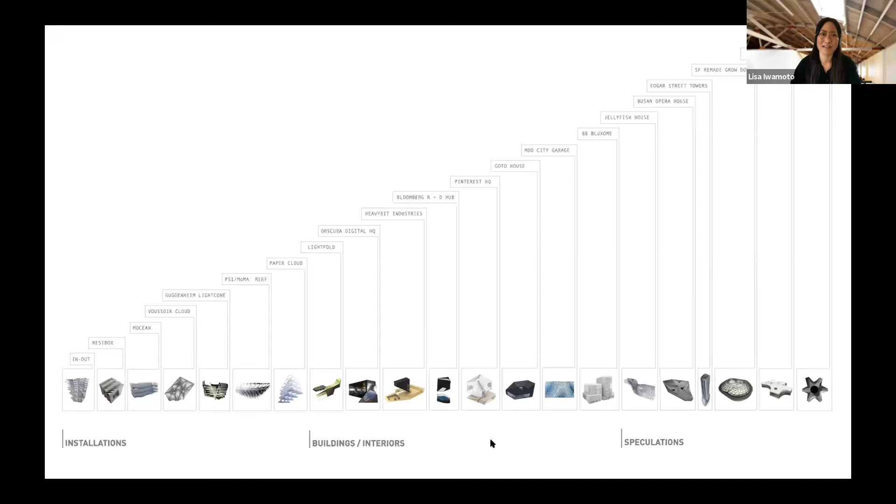So with that, I've culled the group of projects quite a bit for the sake of time, but also rearranged them for some conceptual clarity, and then added some more recent projects in, as well as some things that we have on the boards.

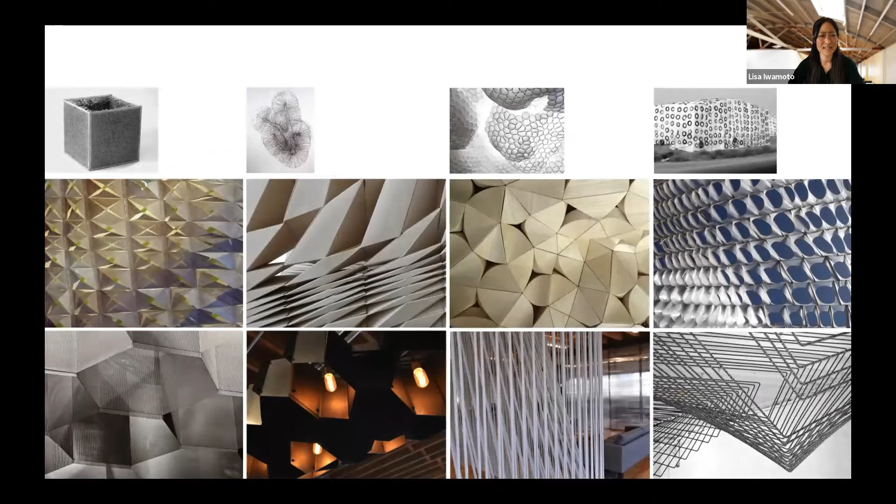So with that, I'd like to begin first with the installation scale. Here for us, we're very much inspired by conceptual and abstract art, which is shown here at the top. This is an Eva Hesse piece and Antony Gormley.

The idea for us is how multiple parts can come together to create a more synthetic whole, and how that whole can give a kind of perceptual performance that the parts in and of themselves might not have. Then there's a Tara Donovan styrofoam cup piece, and actually just a tire ballast over some hay bales in the Midwest. The idea is how ordinary materials can be transformed and defamiliarized through the way they're brought together.

Our installation work was really twofold. On one hand, we were looking at how to make thin materials volumetric and how to think about creating structure through geometry. I have a structural engineering background prior to becoming an architect, and while I was not a very good structural engineer, that experience has now folded into our practice in a way that is very tangible in how we think about materials in different ways.

The other side of our material explorations had to do with how we can take something quite ordinary and turn it into something that is perceptually more performative than the original piece itself.

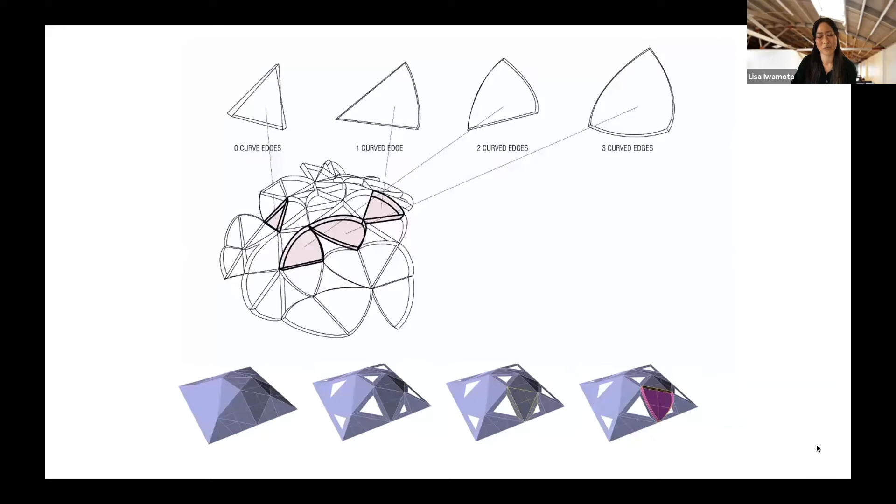In other words, the closer they were together, the more structural the overall form became, and the less they were packed together, the less structural the form became. This is where the conceptual clarity of the project came together.

We were making little handmade models for a number of weeks without really knowing what we were doing. It was only as we started to assemble them in greater parts that we began to realize what we were trying to achieve: a kind of mashup of 2 structural paradigms.

One being the idea of the arch, which is a pure compressive element, and the other being the idea of this very thin catenary member, which has almost 0 stresses. So how can we fold those things together to have the ultra lightweight spanning element that would normally be in tension, but actually here is in compression.

At that point, we started to work with some really good engineers in Los Angeles to do these digital hanging chain models for us and to start to understand the flow of forces overall, which of course influenced the way the modules began packing together.

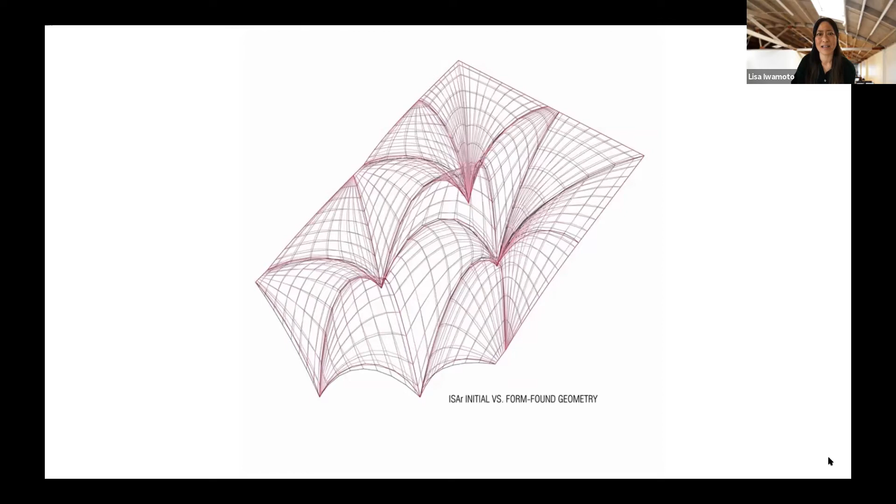This is just a bit of description of the process, very edited. What you see here is the gray surface, which is the surface we provided the engineers, and the pink surface came back to us. Through that subtle change in geometry, the engineers were able to modify the structure and reduce the loads by about 90%.

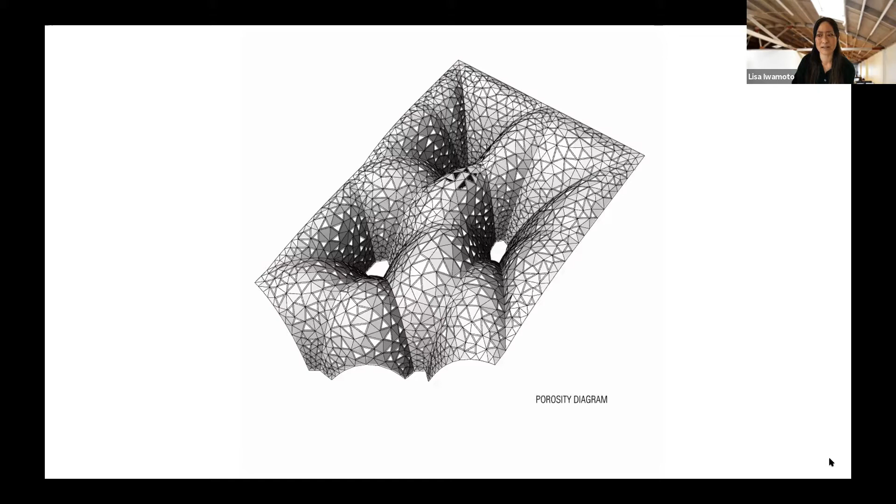From there, we tessellated it to have more openness and porosity where less structural performance was required, and more packing and tighter knit, closer modules where we needed the forces to be able to travel down into the columns.

Then ultimately a script that would help generate those modules. We were really lucky in this particular gallery. This is a voussoir cloud at the SCI-Arc Gallery, in that the gallery is not only seen from within, but it's also seen from without.

There was a very different experience from this catwalk on the upper level, where you could see the overall form and structure, versus what it was like underneath, where we were most interested in the material's ability to become translucent at times, as well as the pattern casting a certain quality of shadow and light.

For us, the translucency was really important because this asymmetrical hypostyle hall, we wanted to recall the idea of the former vaulted stonework that hypostyle halls had throughout history. Sometimes the modules feel quite opaque, almost like that voussoir block, the voussoir being the stone of the arch, and because of the curved seam, almost seeming like it's in compression because of the weight, although this deformation is really more because of the geometry of the edge.

And then at other times being that ultra lightweight member. So the material itself could speak to this form and overall structure being both compressive, but also seemingly in tension and almost ephemeral as well.

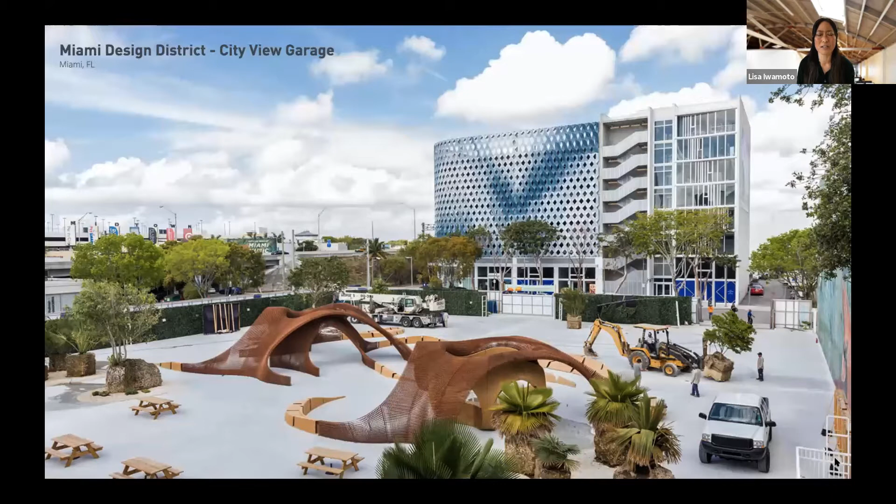And then from there, as we started moving into the building scale, I grouped this with the installation because for us these are just bigger scale installations. We were again really interested in how to take something flat and, through folding and geometry, allow it to have some structure.

I'm not actually speaking of these fantastic pavilions by Shop, which are in the foreground and are 3D printed, but rather the parking garage in the back, which included a small office space, the stair, and then the facade. Here the material is aluminum rather than wood, but in principle the way the folds work is very much the same.

Of critical importance to us was that the facade felt like a mural across the face of the building, and didn't seem like panels, structured individual pieces, but rather a whole across which almost literally paintbrushes would take a swath over the top.

This was a mock-up which showed the original structure, which had a series of verticals behind, and this is something we really tried quite desperately to avoid. Because of that, the form of the panel had to be self-structural as well.

So this starts to describe what that structure is: there are a set of verticals cantilevered from the top and also the bottom of the slabs, which allows the middle panels to be free floating. They're obviously held in gravity, but also this is Miami, so there are hurricane force winds there, and these middle panels need to resist quite a bit of lateral load. They're able to do that because of the folding of the pieces themselves.

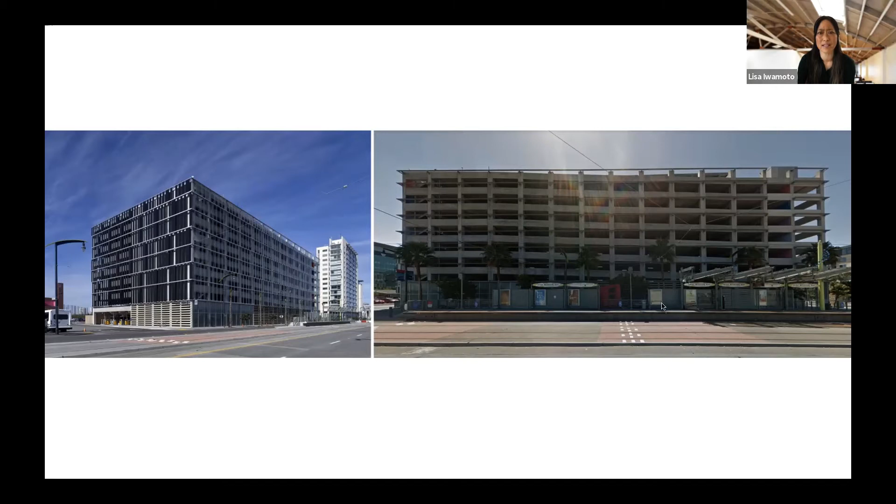They were never able to diagnose the reason why, but the glass panels were cracking, which of course is not what you want, because it can crack and fall and hurt someone on the sidewalk below. So the garage stayed in this unfinished state after they removed the glass panels for almost 10 years, and people kind of accepted that as just the final garage design, without much of a facade on it.

But more recently, the Chase Center, home of the Golden State Warriors basketball team in the San Francisco Bay Area, was being built across the street. They approached the client, the University of California at San Francisco's medical facility, who didn't want to be looking at what felt like an unfinished garage and asked if something could be done. So we were invited into a competition, which we ultimately won, to put a facade on the existing structure of the garage.

Because UCSF is a biomedical research and teaching facility, it was important to them and to us that the facade could speak to their brand and what they did. So we developed a series of abstracted panels based on the DNA strand, as well as DNA sequencing along vertical stripes, and used the existing horizontal rails to attach this vertical structure.

This was a very limited budget project, so we wanted to use everything we had at our disposal. We also wanted to develop efficiency in the modularization itself. While we wanted variation, we didn't want 1,000 unique types, so we developed 12 types and a few halves.

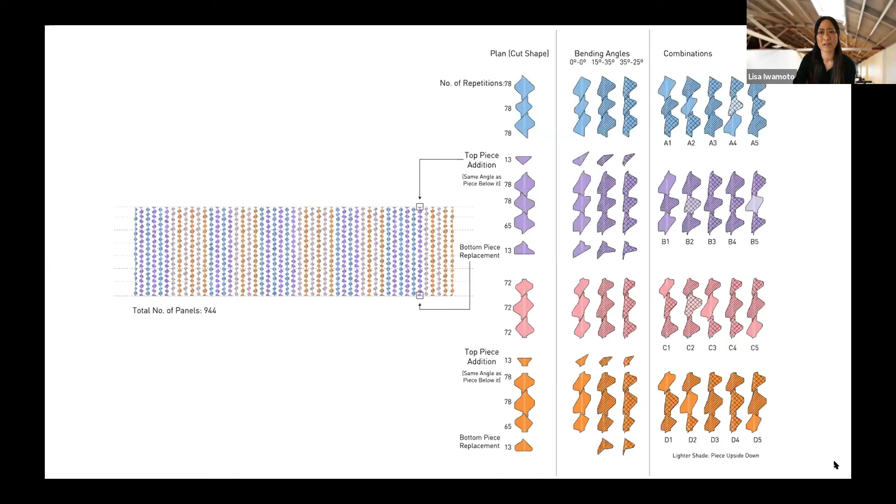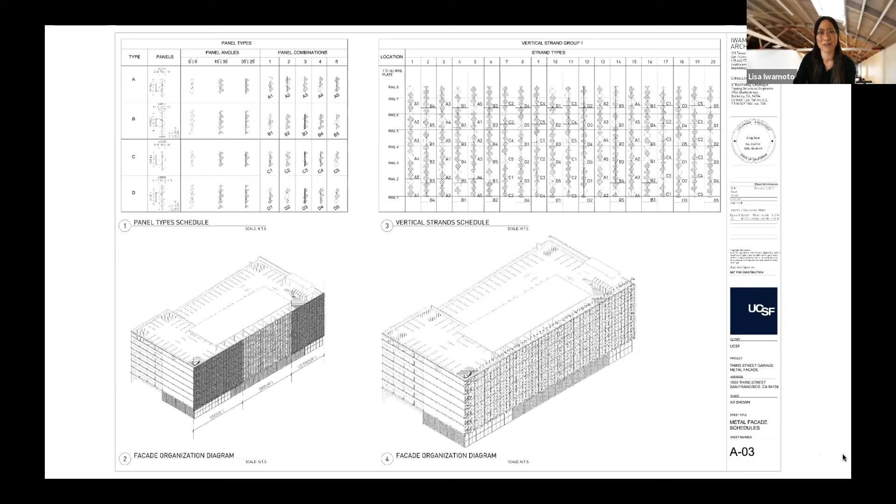Each panel type could be bent at three different angles, and through mixing and matching different combinations, we could get quite a large variety of paneling and angling throughout the whole facade. This just describes the bit of repetition we had across the whole face, and our cheat sheet on how the different modules came together for building.

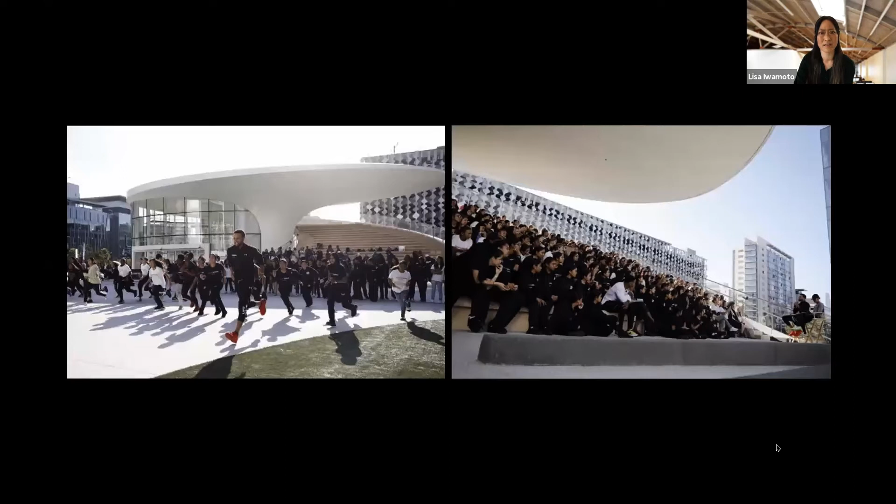This is a view from the Warriors Arena Plaza, and it really serves as a backdrop for events, which is one of our intentions as well—that it could be something somewhat striking when moving by, but could also just fade into the background for those kinds of events, which happened there quite a bit pre-COVID, and we hope will happen there again very soon.

At the building scale, we are still very interested in material exploration and geometry. We tend to be able to do that in a more full way in some of our competition projects, because we have the ability to experiment there, but it's still something we try to bring into our built projects as well, albeit maybe in a more confined or limited way where we are able.

But as our scale shifts toward thinking about buildings, our concepts change as well. While we're still interested in material exploration and use, we're also very interested in form and space. The idea there is something my partner Craig Scott has been obsessed with, and therefore I am too—though he's been obsessed with it over time—the idea of the double negative.

On the upper left here is the Michael Heizer piece entitled The Double Negative, which is a man-made cut going through a natural cut. The idea overall is that two voids can come together to create an intersection which is more than the sum of its parts. And that can happen at multiple scales—the scale of sculpture, the scale of an interior, and the scale of a building.

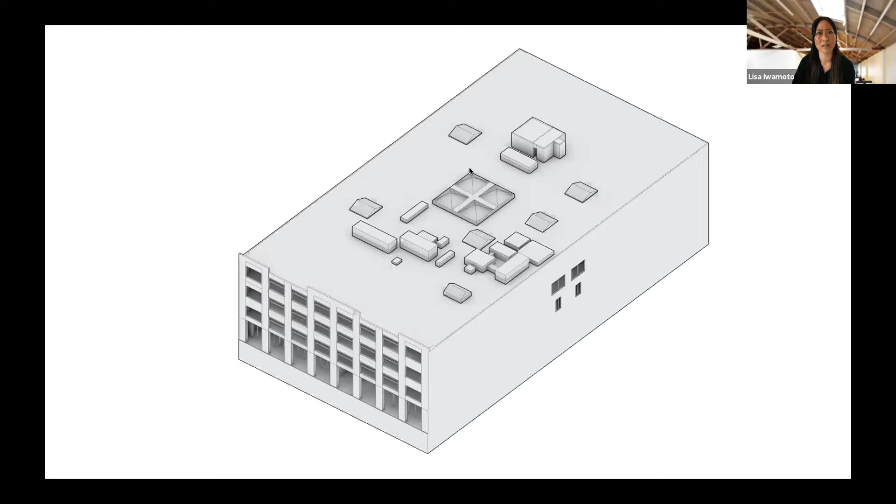The building was very light challenged. It had light on two sides, and then at some point in the 1980s, which we can all agree was not the high point of architecture, particularly in the United States, they added a skylight down to the second floor. Our first act was to bring light further into the building and cut a hole down to the first floor. Our second act was to insert a stair, which at first seems kind of counterintuitive—to cut a hole to bring light down and then put in a stair.

The idea was that the stair could be a light filter as well as a vertical connector throughout the space. That really forms the heart of the building, around which all the circulation, and on the ground floor anyway, all the public functions happen.

We also have a very simple installation at the front, which is this plywood waffle grid, because Pinterest did not lease the full building when they moved in. The idea would be that it could really feel like a Pinterest building at the lobby, which they did own. So this was a kind of takeover moment against the urban edge.

The use of plywood was also quite important to us because Pinterest, as a company, really cares about an economy of means. What we were trying to do is use humble materials in a new way.

Really our work, I believe, had to do with how to bring in light in multiple ways—whether it was through subtle shifting of material, through a simple array of fixtures that could define one space apart from another, through the glowing coffers of the plywood entry, or through the stair itself.

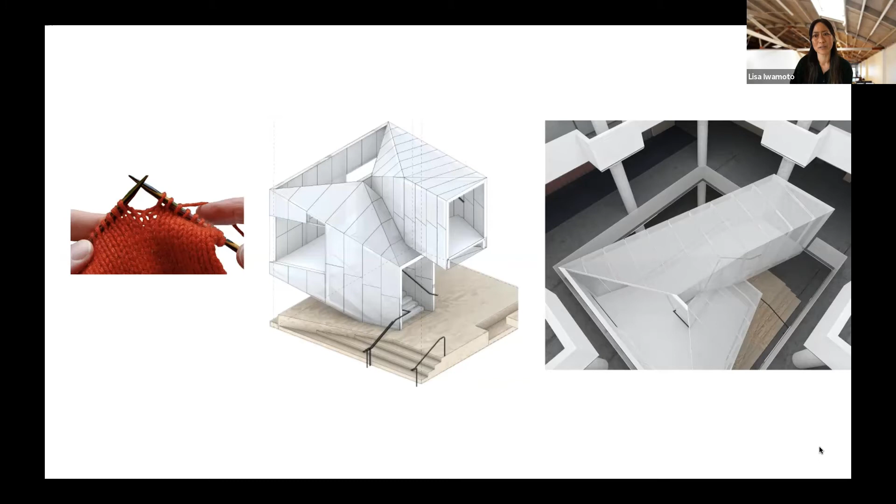There's also a story behind the stair that taps into Pinterest's brand. One of the words they use a lot in their company is knitting, which is about collaboration and cross-functional teams. We took it quite literally, the idea of bringing two things together to form a third. That third was actually a void space in the middle of the needles, critical to building the actual sweater or scarf. So the stair is like two halves of a needle which self-intersect, and that intersection forms a double negative of the stair itself.

This is a view from above in the 1980s atrium, which we did very little to other than paint it and add some plants. But when looking through the stair, there's this transparent moment, this prism, which is that double negative aspect of knitting.

As Pinterest employees bring visitors and partners through, it becomes a small story for them to speak to knitting and how that's really important to the company culture, embodied abstractly in the volume of the stair itself.

The stair is really big, much bigger than it needs to be. So it forms a kind of place for other people to have conversations and even congregate sometimes. It really has become the heart of that building.

This is the double negative intersection from below, and this is it from above, where it forms this glass prism. Then the stair rises up on the second level, a little bit like an animal, to capture the light from above and form the circulation around.

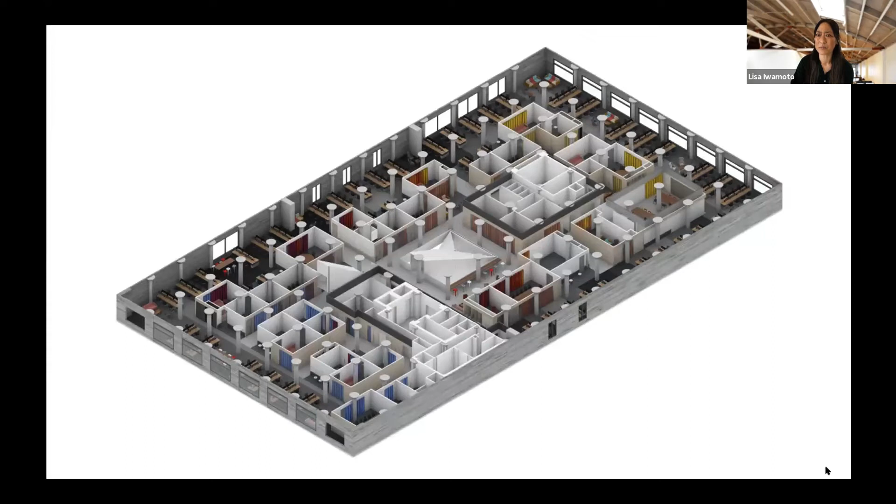For the rest of the space, we thought of the floor plan almost like a mini urbanism. Some of our speculative work came in handy here, because this was the first project of this scale we'd done, period. We had done two interiors before this, and they were both quite small.

Thinking of the floor plan as a kind of mini urbanism, it was just a series of volumes. We were much more interested in using volumes as a way of creating blocks, neighborhoods, streets and alleys than using walls as subdividers and separators of space. So we have a series of volumes which separate and connect the more social, louder center with a quieter perimeter for heads-down workspace.

The volumes take on different characters, sometimes quite transparent and other times semi-transparent. We also had a series of color-coded curtains that acted as an intuitive wayfinding device, since it's a fairly large floor plate and can sometimes be a little confusing.

The other thing we developed was a glass corner, which enabled these see-through, peekaboo moments from open space to open space or from closed space to closed space. It was again the idea of knitting as a visual metaphor, allowing these intersections to happen through a void rather than through a solid.

It also deals with any FOMO employees might have, because while they're moving around this large building doing different things, they also want to be found in case a team member wants to pull them into a conversation or another meeting.

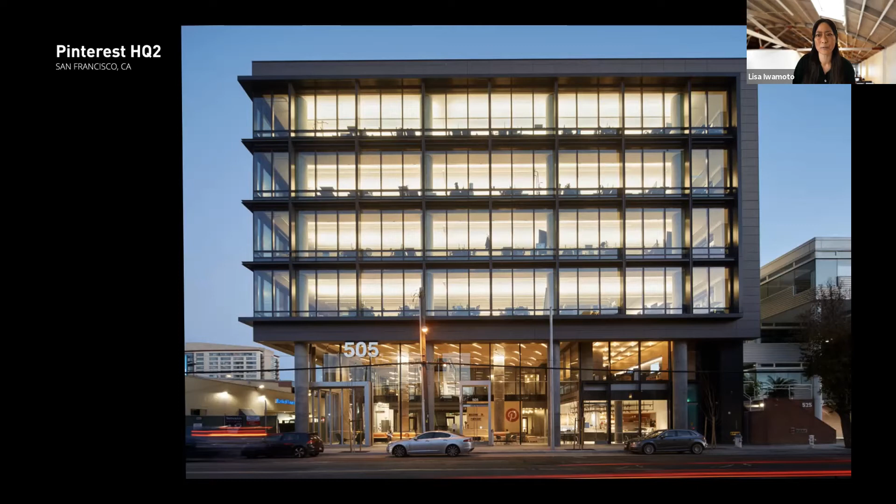So we started to look at slightly more refined materials, but still wanting to use them in a slightly different way. This is the lobby of Pinterest, which is actually also a public space. While owned by the building, it's open for anyone to use during all working hours. That's a San Francisco mandate, mandated for this building as well as throughout the city, and it forms a really nice network of these public spaces within buildings.

Pinterest was really excited about this opportunity. Even though they're taking care of the space, they were excited about bringing in the public and having people there who could share their work with them in a way. So what they did is they chose to open a cafe, and we developed a full kitchen in the basement where they would run this cafe. The cafe becomes part of the lobby, not really closed off, but fully open. It does form that intersection between the public and the Pinterest employees, in a really wonderful way.

So the lobby is very reconfigurable. It has seating, it has tables, it has small spaces for the employees to use as an extended workplace, but it's also a place for anyone from the public to come in. That said, we of course needed to separate out the work of Pinterest across a security line, with their day-to-day operations kept from the public. So the public cannot wander through the entire offices, of course. But we did want to have another kind of intersection among the populations.

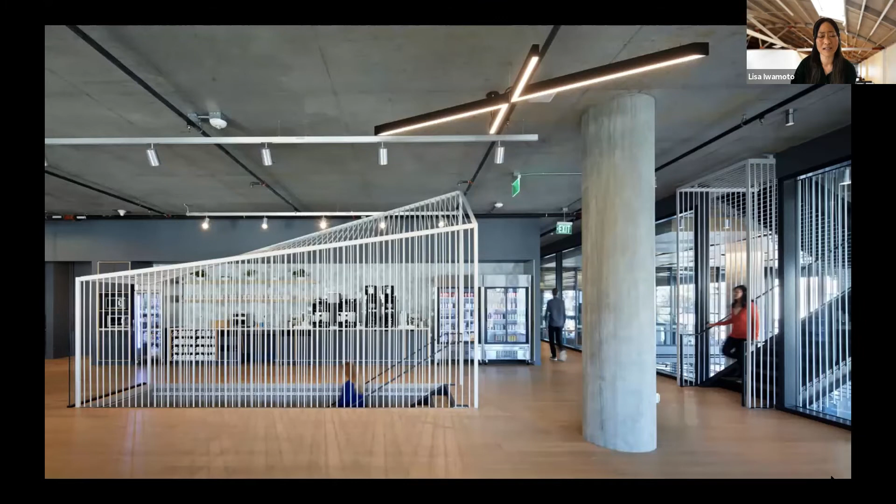This is an entry, this is the rear entry, looking the other way down that internal street. And then moving up, the stair becomes more like an object in the different rooms, and an intermittent connector across the floors.

This is the all hands space. Again, this had a much more limited floor to floor height. So what we worked to do was really compress the typical acoustical sandwich, which often takes 18 inches, here we compressed into like 6 inches. And in doing so, developed integrated lighting which could be both embedded and float free from that acoustical surface, taking on different geometries along the different sides. This again serves as their all hands space or lecture hall, as well as their dining hall.

This is a stair that cantilevers out over the public space. And then the switchback moment describes how it shoots its entire way through the building. This was sponsored by the desire to communicate across the different horizontal levels and have a really clear passageway through the building. Very different from your typical switchback stair.

This was taken right before the building was fully occupied, but pre-COVID it was really like a freeway—people moving up and down, particularly during lunch hours and areas of high traffic. But just the idea of seeing where you're going instigated so much more movement through the space. And the stair itself is clad with metal rods.

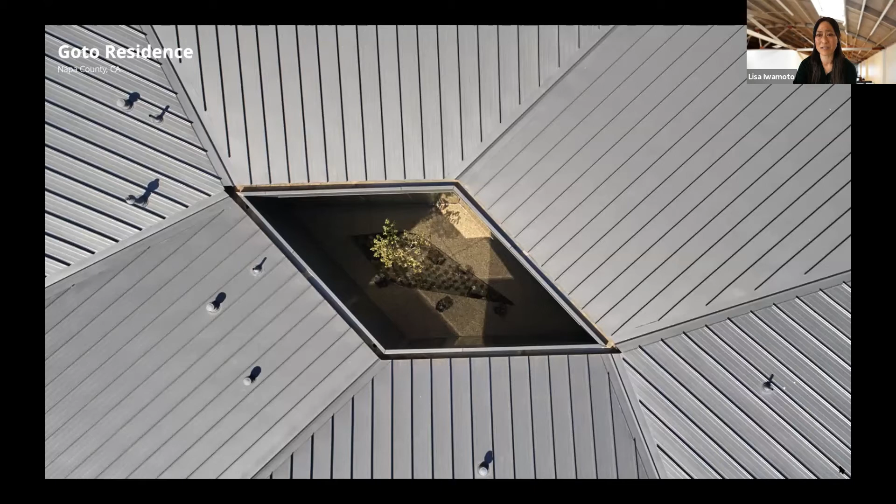Moving on to a full building, this is the Goto residence, which is in Napa Valley. Even though it's a very small building, only 2,000 square feet, 200 square meters, we were able to think a little bit more about what it means for us to design a building in the round. Being in San Francisco, which is a very dense urban place, we're actually not often able to design whole buildings in the round. Even office towers in the city are often hemmed in on two sides by other buildings, in a zero lot line condition. So we were really excited to pursue this project.

The project itself is sited on 95 acres, a really big piece of land in the wine country, but not really in the wine country valley—more on the other side of the hill, which overlooks a beautiful lake, Lake Berryessa.

Clearly looking out to the lake is a really beautiful view, but even looking every direction on this site, there's something kind of different that it offers. There's a quiet side, a side that feels a little more tame with rolling hills, and a side that feels more foresty with the larger mountain behind and bigger trees.

So we really wanted to think about what it means to do a building in the round. And this is a building sited right here.

The house is completely off the grid. It gets its water on site through a creek, which we tap to fill cisterns, and it runs fully off solar power. The garage, also a very simple building we designed, acts as kind of the battery for the house with the solar panels. The water tanks are behind it, and we trench it through into the house. So again, completely self-sustaining as a piece of property.

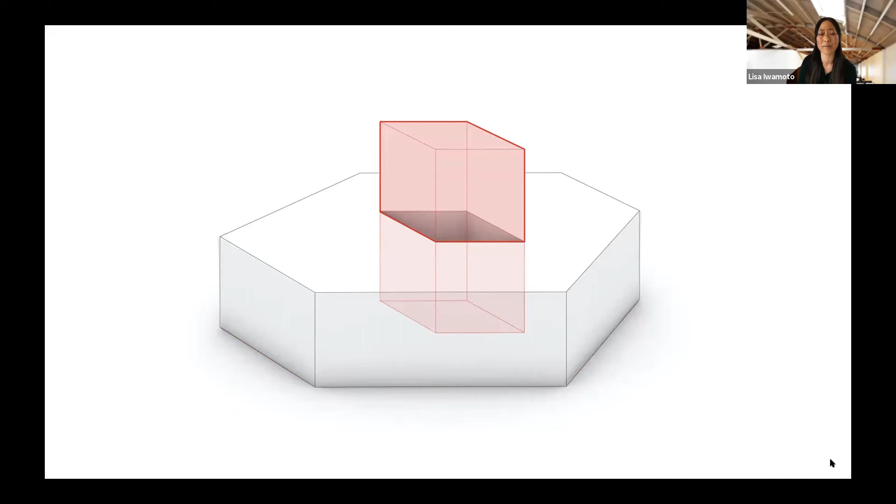So the idea for the house is to take this asymmetrical hexagon, and while it's very outward looking to the views all the way around the site, we also wanted to think about a quiet moment—so also very inward looking with this rhombus courtyard.

The site actually has heaving soils, meaning very unstable soils. In the beginning, the building was structured with deep piers that would go down, like typical piers do, to more stable soil, which meant our building was kind of sitting up on these little piers. At that time it felt very grounded, I would say.

And it wasn't quite in keeping with our intention for the house, which is that while very locally manifest through the views, we didn't actually want to create a house that felt like it was born from the site, but rather something that could hover between being an imported object as well as being very site responsive.

So through the heaving soil discussion, we worked with a structural engineer to make a mat foundation, at which point the building kind of became a slab on grade, which is also something we didn't really want.

So Craig, my partner, woke up one day and said, 'I dreamt the solution to the Goto house.' I was like, 'Oh great,' because I really hated the foundation now and couldn't come up with a better solution. He said, 'Yeah, we're going to cantilever it.' So the building is cantilevered off the base, and it kind of acts like a boat in the water on these heaving soils.

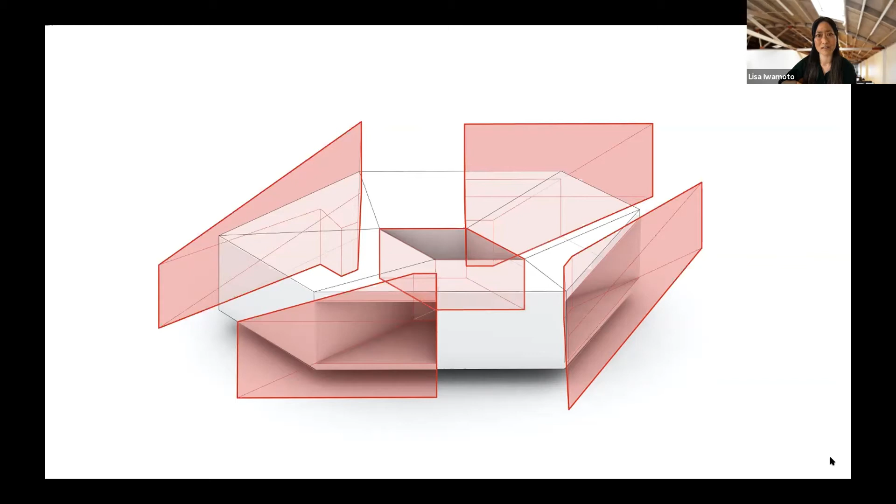At the same time, we've sloped the roof in to capture the little rainwater that does come to the roof into a gutter, which wraps around the exterior of the courtyard. Then there's a series of other porches carved in to take advantage of those views, constructed largely through the view angles as this in-between inside-outside space in order to look at the different sides of the site.

So while asymmetrical as an overall geometry, the rooms themselves are actually really straightforward—just a series of rectangles, very easy to furnish and relatively straightforward to build. There's the kitchen and dining room, a kind of study or yoga studio, another set of kids' bedrooms, and then the master. Those all pivot around the central courtyard.

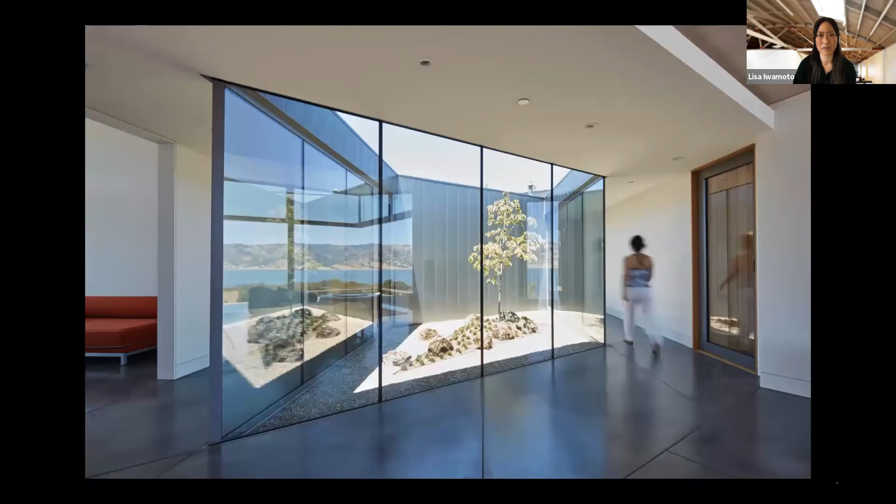And in visiting it, during construction and a little bit after, what I particularly enjoyed is just some of the frame views that would make. And this is a view from the back.

So against the courtyard, there's actually a poche piece. This is a closet, and inside this closet is basically the brain of the house. That's where all the infrastructure from the garage comes, and this is where all the panels and the controls for the solar and water are housed.

Just moving around again, and then just really different views looking out to the different sides of the landscape. These photographs were not taken at really too dissimilar a time, but the light quality as a whole is so dramatically different.

And then on the interior, a pretty simple and sturdy interior, a concrete floor, relatively open. Our client was an electrical engineer, he had worked at Apple, and so we developed just a really simple ceiling and an integrated light, and he actually spec'd all the light fixtures for us, which is really fantastic.

And just some more views, just understanding the building as a whole. So while quite simple and rectilinear, those volumes actually have a more dynamic character because of their relationship to each other around the central courtyard. And then a view looking out to the larger site.

We also thought about the lighting as being able to structure the movement of the building or reinforce the geometry of the building, which we did around the inner courtyard, as well as the outside perimeter.

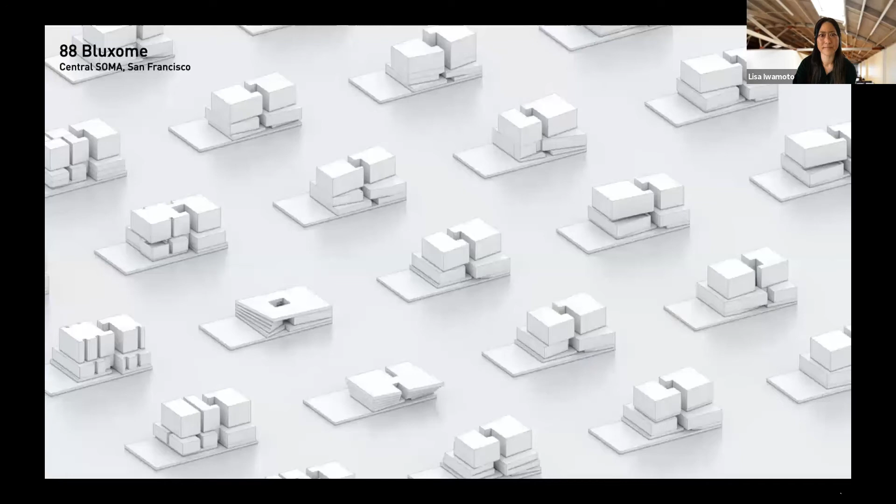And then moving up in scale again, this is a project that we're currently working on. It's in construction, meaning it's a huge hole in the ground right now. So it'll take a number of years to build, but we've been working on this project for 5 years.

And so this is maybe a symptom of San Francisco, which is just, it takes you forever to get approval from the planning department in the city. And because of that, we had a number of iterations. We have a number of iterations anyway, though, because we love to study the volumetric character of the buildings.

And so the idea would be that the building could be divided into two tenants or multi-tenants, and that the building would have different characters throughout. And that was also mandated by the planning department, which I'm going to show in a minute.

But in any case, one of the interesting things about the site is that it took over the place of these 24 tennis courts, 12 inside and 12 outside. And it was a mandate from the tennis club who operated the building that 12 tennis courts fit inside our building. So they actually fit in the basement of the project, which serves to connect the underground together, which of course affects the structure.

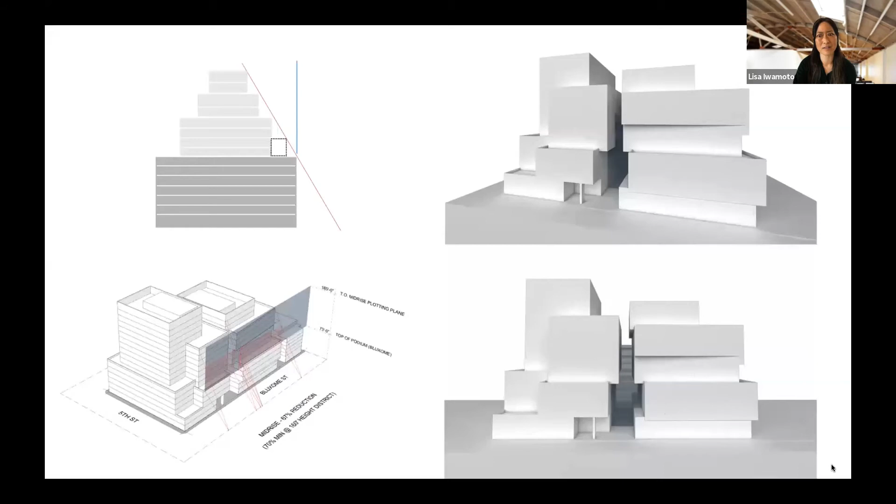The West Tower becomes a series of pixelated blocks, while the Eastern Tower becomes a series of sliding, shifted massing that celebrates more the horizontal. That is what is described here. And then an earlier rendering of the way those facades started to develop around the two different towers: the Western Tower with pixelated, more rectilinear volumes taking up the challenge of the more punched, cementitious facade, and the Eastern Tower, more a series of shifted and sliding horizontal volumes, taking up the idea of the industrial sash, more like a veil across the front of the building.

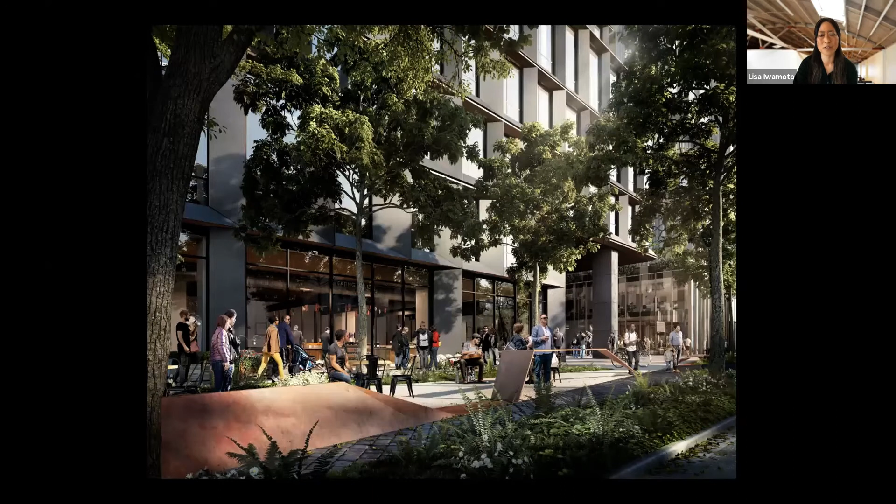This is a view from street level, showing our desire to take something which is maybe more often two-dimensional, such as the skin of the building and the facade, and create some three-dimensionality out of it, through the geometry of the window, and how those two come together across a center spine. And then for the veil-like building, we're using sculpted terracotta to form these vertical ribbons that add dimensionality, depth, and also shadow to the edges.

So this is just a more current rendering of the project as it stands now. Both facades take up an attitude of having some variation to the different facade panelization types. The idea here was that there's actually a kind of natural podium level in this formerly historic fabric, and what the planning department initially asked for is that the bottom looks like an old building, or has more of the proportions of an older building, with the glass tower on top.

We were actually interested in not doing that, and instead thinking about how to distribute either the idea of the punch or the idea of the industrial sash up the building, so that we could unify the top and the bottom together, but also have some differentiation. The way we chose to do that is to have a bit of a gradient.

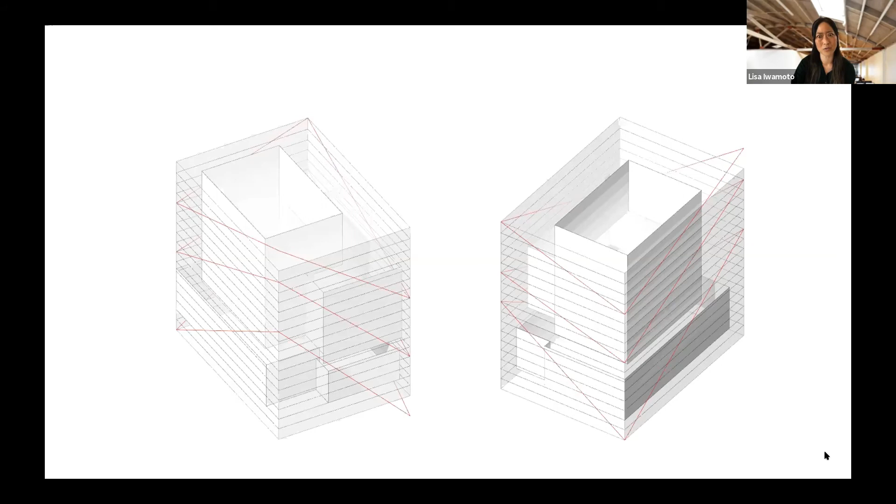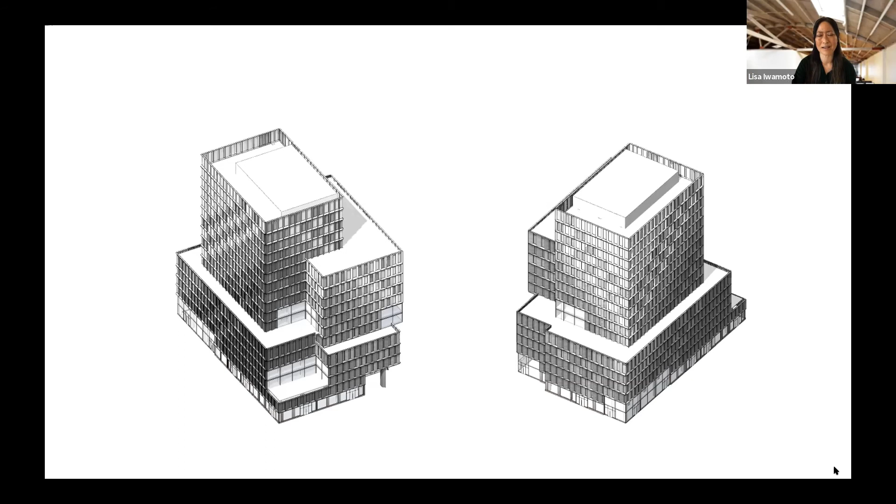That bounding box was then projected onto the massing of the building itself, and that began to dictate the different porosities and openings of independent modules. We don't actually have that many module types—we have 4 basic types and then a collection of other types to deal with corners and things like that, arrayed around the building as a whole.

We had a similar exercise, which I won't show here, for the Eastern facades, which have a change in transparency from wider terracotta panels to thinner terracotta panels along some of those same principles. This starts to describe what those variations look like for the different pieces, as well as the whole.

The overall intention, very much like our other projects such as the Miami Design District garage, is that the building would change as one moves around it. The Western facade, for example, has a cementitious material for the large window cuts, but a copper color material for the smaller frames and edges. So when one looks at the building from one angle, it appears as one kind of facade material, and from the other angle, it has the other.

And a view from the project overall.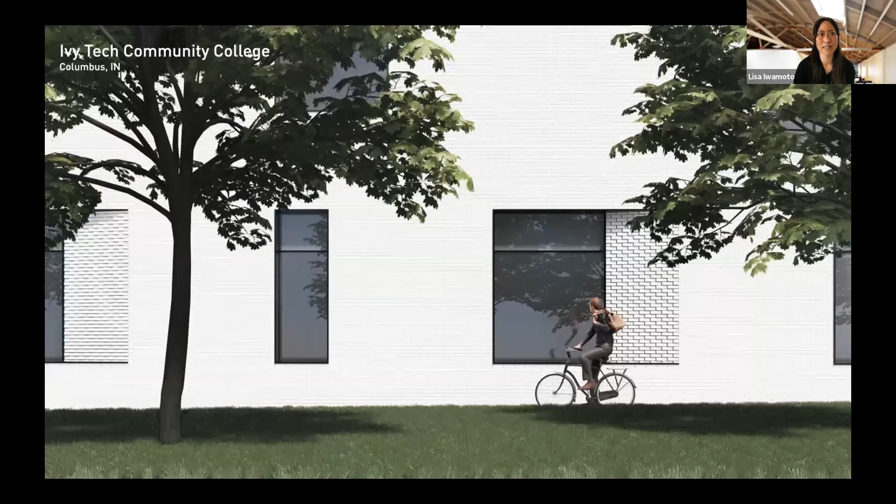More recently, currently, we were awarded a commission for what we call a campus in a building. This is for Ivy Tech Community College, located in Columbus, Indiana.

For those who don't know, Columbus, Indiana, in the Midwest, isn't normally thought of as a bastion for excellent modern architecture, but it actually is a mecca for it. In the mid-century, a corporation called the Cummins Diesel Engine Company worked closely with architects like Eliel and Eero Saarinen and Kevin Roche to design their buildings. As huge fans of modern architecture, they developed a foundation to support great design in Columbus. It's the kind of place where you can go to the local pharmacy and have a half-hour-long conversation about modern architecture, which is what we did while trying to buy sinus medication because we had a cold when we were there. It's just this incredible, architecturally knowledgeable community.

Our commission was sponsored by the Cummins Foundation for a new school. They sponsor design for public or civic programs. This is for a community college called Ivy Tech, located in the northern part of Columbus. The colored part is Columbus, and the real center is further south, but this small campus is located next to the regional airport, so it's called the Air Park campus.

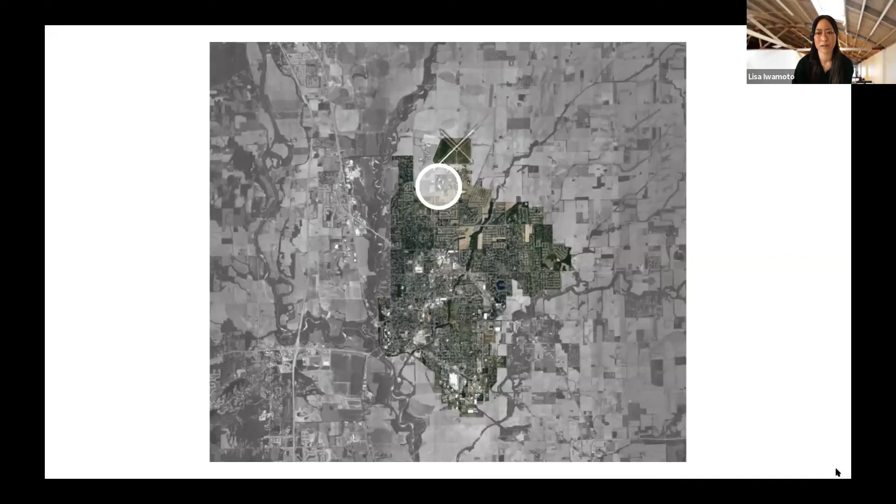They hadn't had a commission from the Cummins Foundation for a really long time, and the city hadn't either. This is one of the first, so we were honored and delighted to work on it. It's an interesting project in that it's a replacement building.

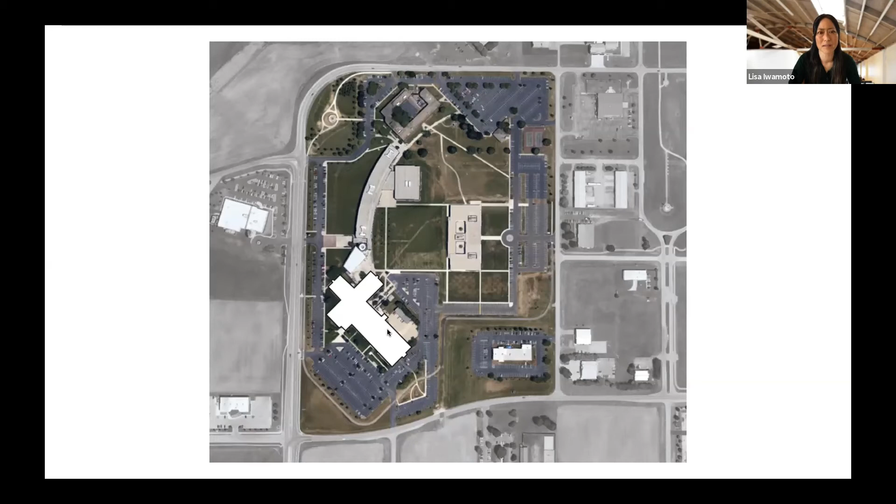This is currently where Ivy Tech is. It's part of a larger campus involving Indiana University and Purdue University, as well as an advanced manufacturing center and a learning center for the city of Columbus, where the different universities and colleges share programs. While a bit dispersed at the moment, especially because of the placement of the Ivy Tech Columbus building, the idea is that these buildings together do form a campus. The Ivy Tech building is the only one they fully own on campus, housing all of their programs under one roof.

Because this is a replacement building, the buildable area needs to work around the existing building, and the idea is that the new building could actually create that quad. In the current building, you could be there for six hours, as we were one day, and not even realize a quad was there, because you enter off the central road more to the south side. After the new building is built, the old one will be demolished.

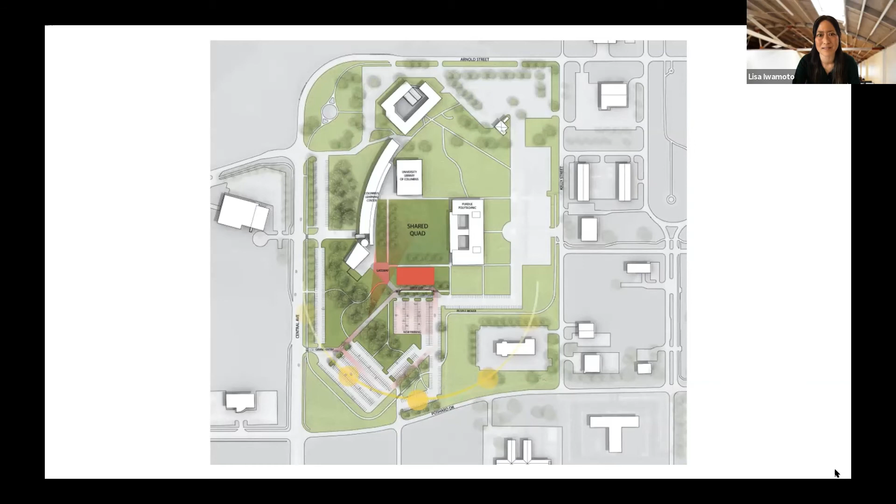There were a couple of primary concerns around creating this campus. One, a no-brainer given to us, was to put the building on the quad to actually make the quad, which makes all kinds of sense. Additional parking, of course, and then a kind of gateway from the Central Ave view, where one could look through and see not just Ivy Tech but the shared quad among the different universities, by seeing the quad from the main road into the campus. That's what really shaped our design.

We had a really fun, challenging, but exciting experience where they had all the architects. There were 5 shortlisted firms, and each went out one day between a Monday and Friday. This was the week before Thanksgiving. We went first, on the Monday, where we got to see the site, hear more about the program, and meet some of the stakeholders of the project.

Craig and I were both sick, which is why we were at the Walgreens getting our sinus medication and talking to the clerk there.

At the very end of the site visit, Craig asked, 'So are you guys looking for any design ideas when we come back?' I think we were going back a week after Thanksgiving, so we only had about 2.5 weeks between this first visit and the second one. And they said, yeah, we would like to see some design ideas. We had our Thanksgiving holiday in between, so we went back to the office and said, okay team, we have to design some buildings or come up with some concepts in about a week when we get back from vacation. So we just threw the whole office at it and came up with 3 different design ideas.

None of these ideas got executed. We didn't have a budget at this time, we didn't know the full program. But really our intention was to show the way we work and how we think. And so this is what we presented in our interview.

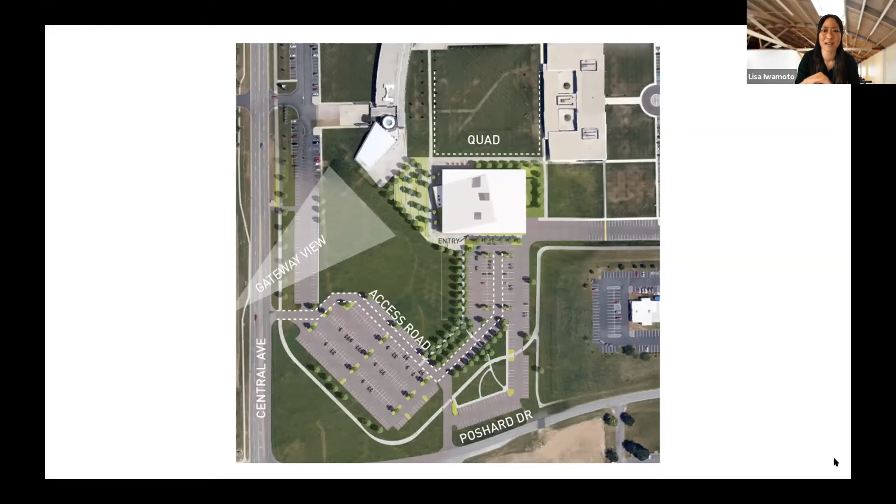So one of the first things that we learned is your building should really be just a rectangle. And it almost is, but we still wanted to respect the things of the site, which is to have that view, the gateway view from the entry road, and to place the building against the quad. Because it is against the quad, which is limited in width, it becomes a very fat building once it includes all the program. The other aspect is the building is essentially the exact square footage of the old building, which is another mandate, although the programs within shifted around quite a bit.

So we began with a box. The idea is, okay, we have this box, this rectangular volume, but perhaps we can make just a few architectural moves to really enhance the site - one being from the parking, to be able to see through from where you're parking to the quad, which is not something you could do in the existing building.

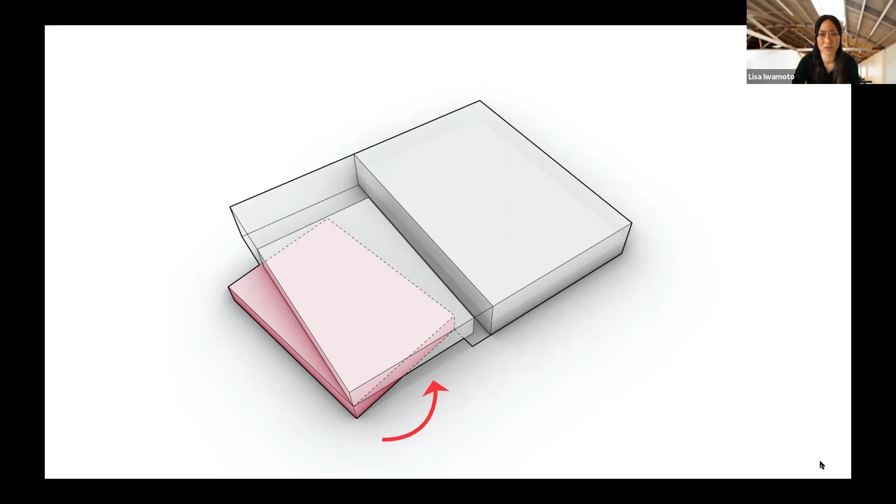And the other move is to rotate that volume so that we might have one small portion which is not within the orthogonal, but actually just shifts to allow for a covered entryway, an opening up of the central internal street, the spine that we have, looking out to the quad, and then a small area in the front which will act as the student commons. So that actually shaped the building as a whole, where all the programs are then nested in between.

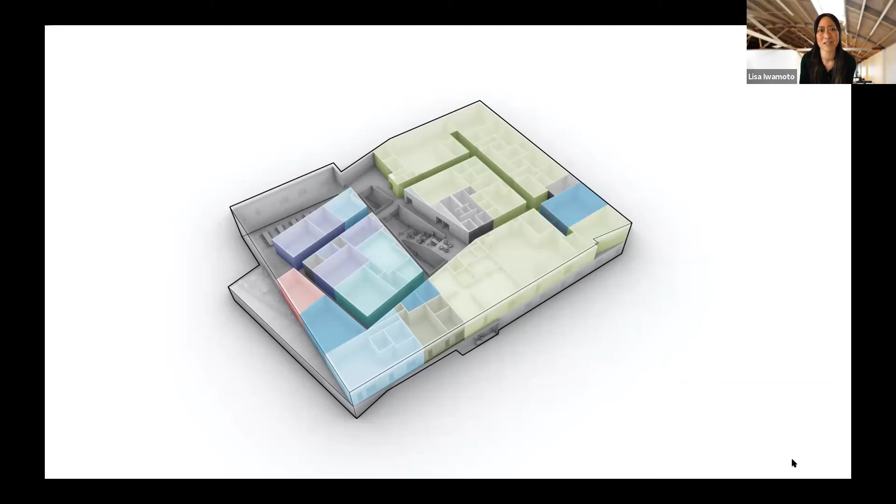There's a number of stakeholders in this project, a number of different programs. They have 20-some different kinds of offerings and degrees you can get, including health sciences, nursing, visual communications, business, and information technology - it's just a really vast range. The idea would be that these programs could then come together around what we call the social spine, as well as the student commons and this pathway through the project.

This is kind of another roof-off bird's eye view, which starts to describe how that social spine works, and then some of the secondary circulation that happens off of it. This is repeated on the second floor with a stair which connects the two together, and a small terrace over and above that rotated volume, which could then overlook the quad as well as the Columbus Learning Center.

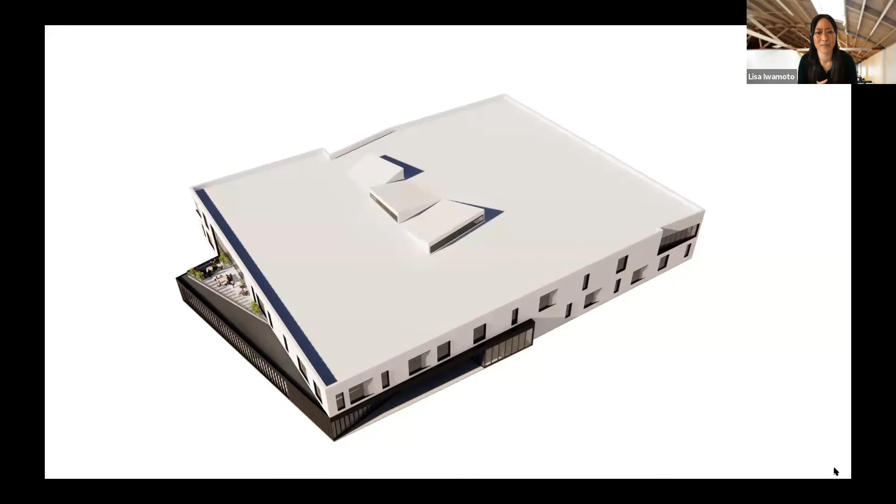And then it was really important for us to have this central spine be skylit. We initially started with a series of much more dramatic skylights, but again, that was quite expensive and didn't fit within the budget. So what we chose to do is something really simple, which is a very standard way of bringing light into a building - having a clerestory, and simply having the clerestories face south, west, and east, so that the light and the time of day can still be registered in the space.

This is a view from above, what that building looks like against the quad and the adjacent campus buildings forming that quad element. Here's the front elevation. One of the first things we asked after we were informed that a rectangle is really the best building form, was what's the best building material in order to maximize cost efficiency for that region? And they said brick.

That was exciting to us because out in San Francisco, we don't do much brick, as brick is not a very earthquake-friendly material. So we chose a white brick for the majority of the building, and then just a simple metal box which rotates out of it.

This is traveling around to the east. One of the things we were interested in is how do we think of brick and do something very subtle, which is the corbelling at some of the windows. We had a lot more initially, but through value engineering, we wanted to put it where it made the most sense to create some three-dimensionality and shadows on the facade.

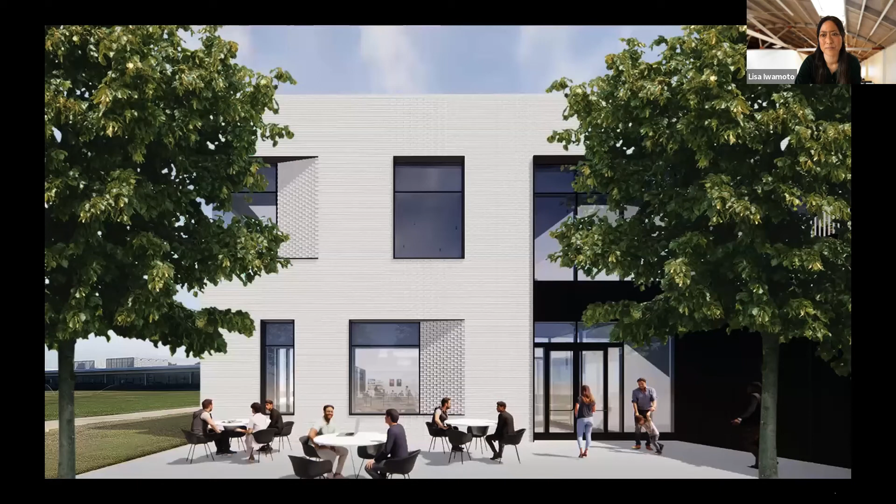This is the quad view with the student commons against the quad, which relates directly to the other campus buildings across that space. A bit more of the three-dimensional views describing the corbelling, as well as the way the glass and materials play out through the whole. So it's simple and volumetric in character, but we feel quite diverse in terms of the space one gets on the interior, and the quality we're working to achieve with this very simple corbelling at the windows with the white brick.

So I'll just do a really quick walkthrough and then show a short animation. Again, that rotated volume cants in to form the covered entry, which is a larger expression, I suppose, of what we're thinking of with our canted windows at the corbelling, and a few other moments of that in and around the building. Moving into the reception, which is intentionally compressed, and then moving out to the social spine.

Some of the geometries - we only have two geometries in the building really, one that responds to the rotated volume and the other which responds to the orthogonal. Together, those form the kind of volumetric character of the central spine. There's also an aviation program, which is a highlight because they do teach you how to fly, again at the Air Park campus.

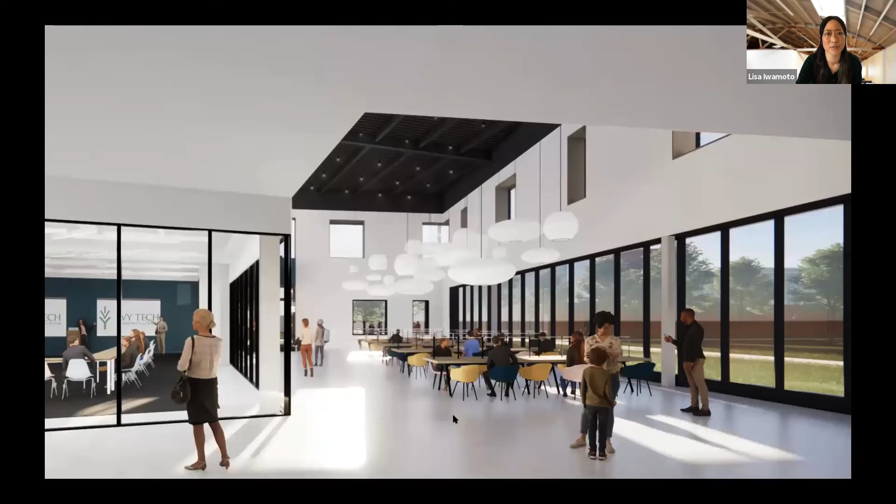Moving through to the community room and the social commons, and then looking back, a wide angle view with the commons, and then a cascade stair. The cascade stair was actually created in one of our really initial studies, and while the building changed a lot, that is something we were able to carry forward into the scheme, forming a series of smaller study spaces overall.

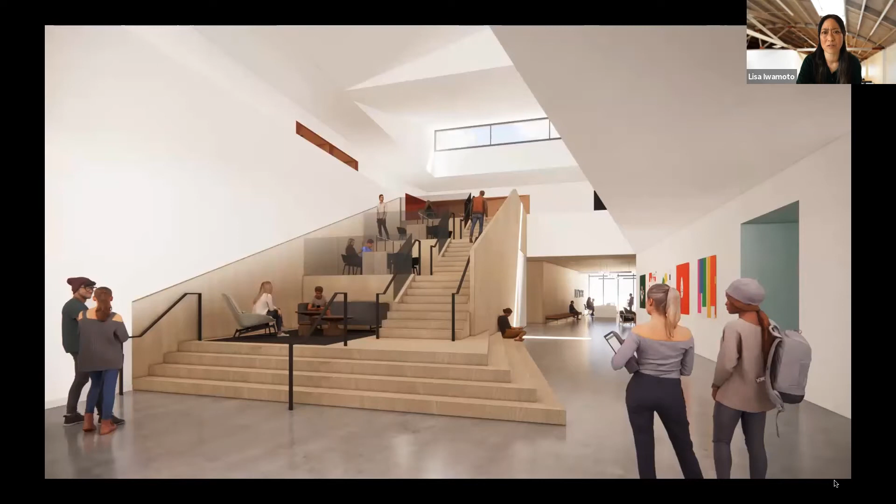They have this excellent graphics communication department - just to go back one. The walls of the building here are shown really white. They're actually owners of the RAND collection, which is an incredible graphics and illustration collection, which will be on display through the building.

This is looking down the cascade stair, and then a view from that second floor circulation, which wraps around. Again, similar and dissimilar from Pinterest with color, just using color. These are the secondary colors of Ivy Tech's brand colors, complements of that, using them in a way that one can begin to locate themselves in the program because of the color of the hallway, which we're trying to use quite volumetrically.

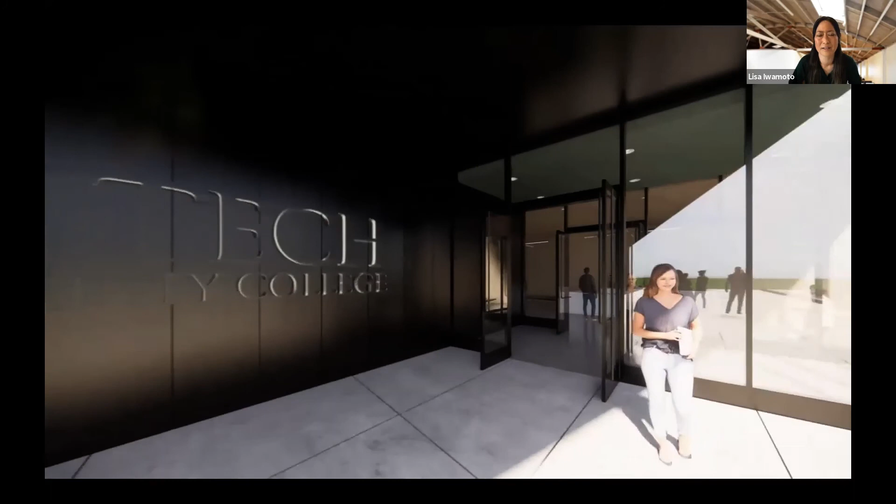This is just a short animation which describes moving in from the parking along that diagonal, under the canopy into reception, using really limited wood, but in places where we felt it made the most sense.

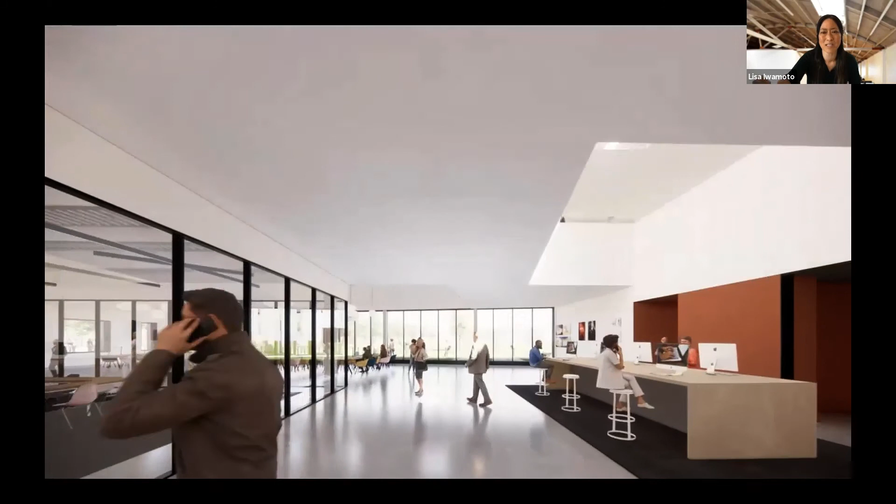This is the express enrollment, so a number of what are currently more contained programs started to move out to the social spine as well. The student commons against the quad - the spine is actually the only place where we have ceiling material. Everywhere else is just the raw exposed structure and metal deck.

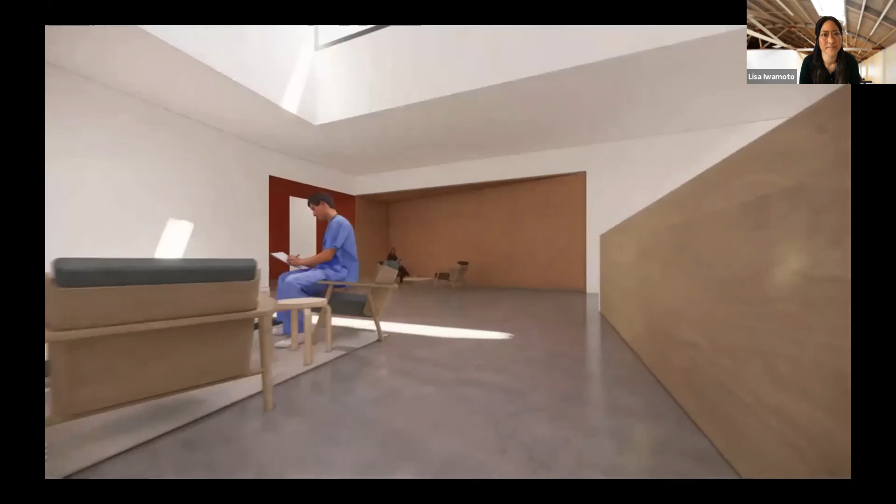Moving up the cascade stair, and then down into the corridors. Here we wanted to use a real economy of means, so just not painting and leaving white for the entries to the classrooms, so that the door of the hallway becomes a bit more celebrated.

These other ones are some of the back of house doors, and then just a really simple linear light fixture to illuminate that space. Again, a raw ceiling virtually everywhere except in that central social spine, with an overlook to the social commons.

Moving down and out to the terrace. There's actually another stair that connects back down to the social spine with a smaller overlook, and then this is outside to the terrace.

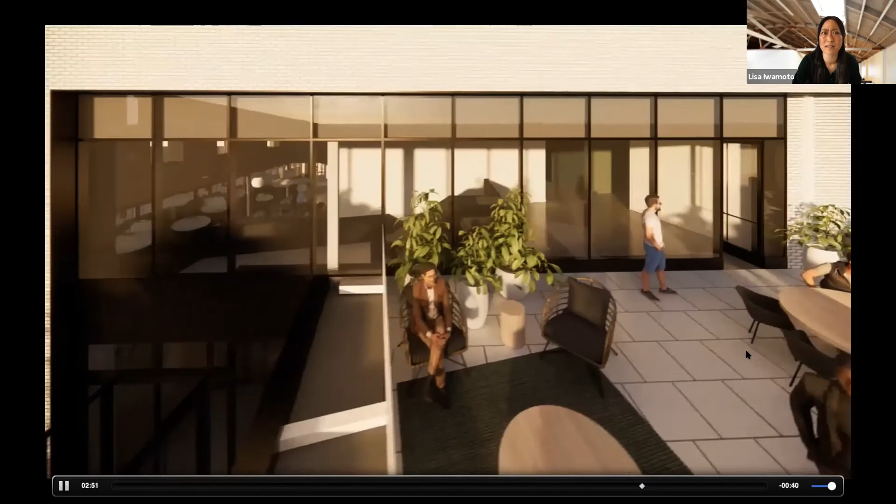And then just different degrees of corbelling, some larger at the terrace door, some smaller at the windows, and some larger again in the middle, which is really the expression of the social spine and a reflection of that rotated volume on the first floor, translating through the building to the second floor and connecting that heart of the building with the heart of the campus, which is the quad.

This is the site currently, meaning it's in demo, which is really exciting for us, and it should be completed construction next year.

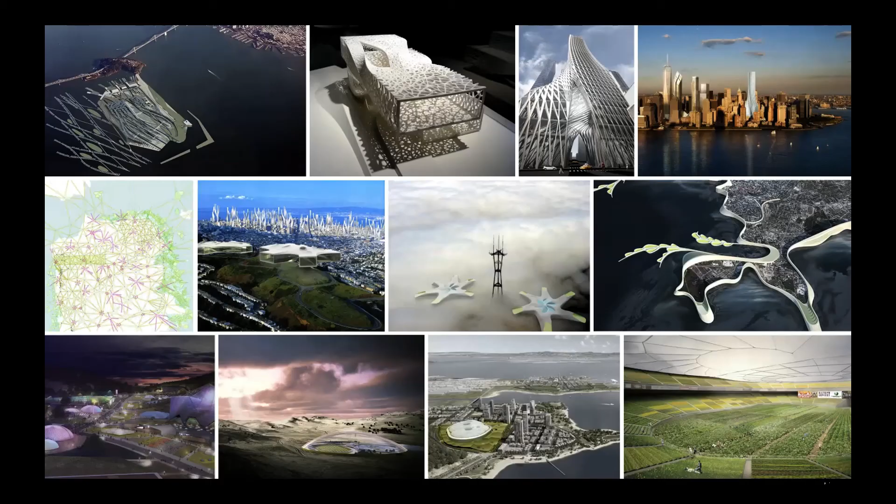So I have two projects to show for the speculative work. The speculative work for us was really a way of working on things that we normally weren't able to work on. Sometimes they were competitions and sometimes commissions by museums. Oftentimes when commissioned by museums, it was about looking at an architecture for the future, sometimes a near future and sometimes a distant future. It was also a chance for us, at the time, to experiment with digital processes that we maybe didn't have a chance to do, or just trying to learn, frankly, at the time.

So that is what we had done for a number of these projects, one of which is the Jellyfish House, which I'm not going to talk about here, but it did lead to a project I would like to describe, which is currently in construction, just broke ground last week. The client, our now client, had seen the Jellyfish House and wanted something futuristic for this exhibition pavilion.

They're building a future science and technology town. They wanted an exhibition pavilion, or as part of the town, an exhibition pavilion which speaks to the town, something which felt futuristic and could speak to that ethos. I don't know if any of you have seen in the news, but very recently online it's been announced that OMA is designing this future science and technology town together with GMP.

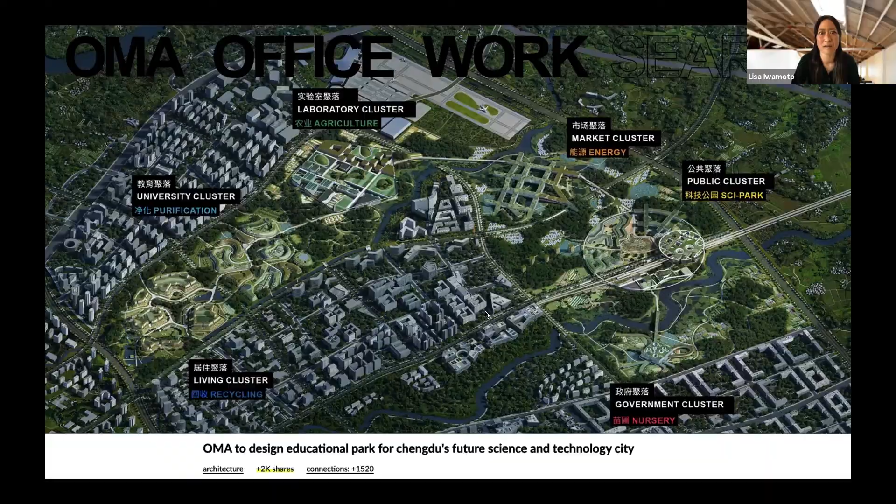So this is the town here, and our pavilion will be the first thing built, directly north of the town. It's also adjacent to the Tianfu International Airport, which will be opening relatively soon — I think maybe the largest international airport in China, but certainly in Chengdu, which is the region. And then there's a beautiful river park in which the pavilion is sited.

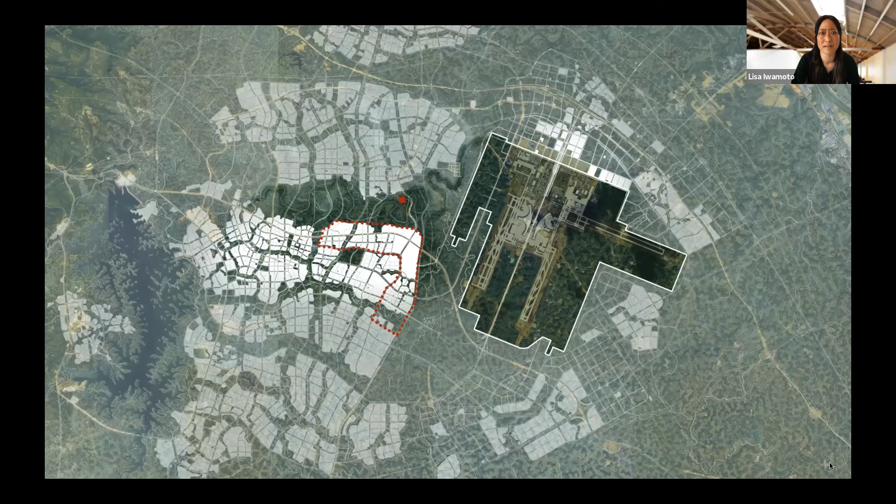The client had actually asked if we liked the Jellyfish House and suggested we think about doing something like that here. Yet we knew when designing the Jellyfish House that it wasn't meant to be buildable — we designed it to be conceptual. So that's not something we were interested in doing. We also fully understood there were a number of things around the site that wanted to be addressed: the town to the south, the airport more to the north and east, and the river park to the west. The Jellyfish House, being more linear in nature, wouldn't really be able to access the more 360 aspects of the site.

So we developed a new form, working away from the Jellyfish House in a sense, but still wanting to take some of its principles and geometric language. Our project is for a pavilion and observation tower. The idea is that the pavilion and its major wings focus out to the three main aspects of the site, and the observation tower has complementary angles.

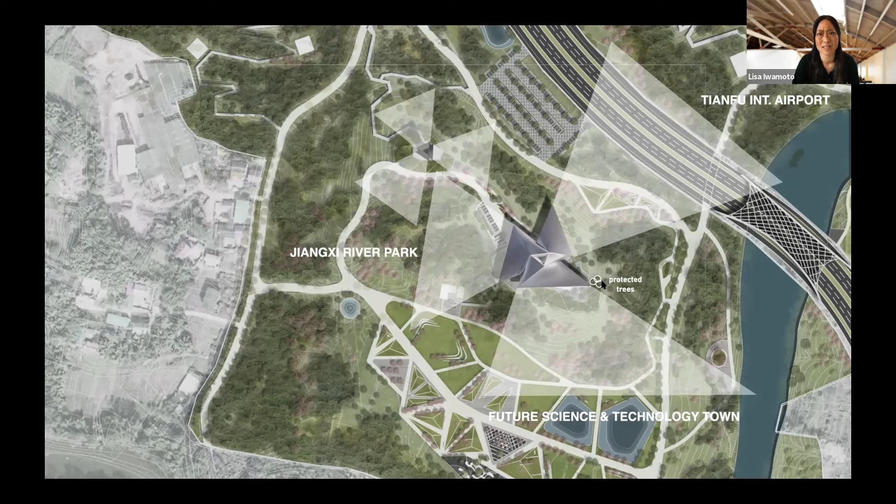There was also a series of three protected trees which began to really site the project for us. So, thinking about really simple geometries of overlapping triangles which we knew to be self-structural, and loving that as a geometric device, we overlapped them so they form three wings with an intersected center, and then a counterposing crystalline set based on a square, which occupies the center as a courtyard.

So, quickly, the diagram of the project: those three wings have a void space in the middle, lifting off the site in order to have views in three different primary directions, and rotating that center volume to form this crystalline courtyard at the center.

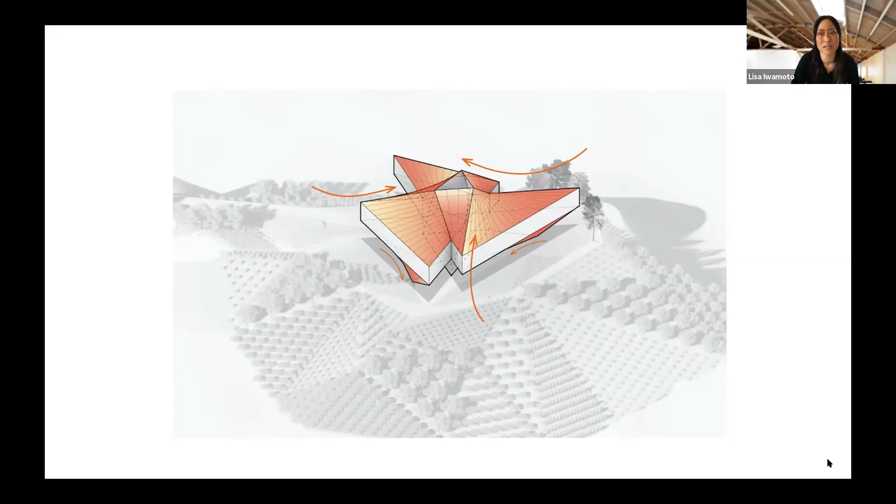So we call this the Intelligent Crystal, because the crystal becomes not just the heart of the building in terms of the lungs of the building and the breathable outdoors moving in, which deals with the hot and humid climate there — very responsive and born out of the vernacular architecture of the region — but it's also the display and technological heart of the building as well. And then, like the Jellyfish House, lofting between our edges to the geometries of that internal moment.

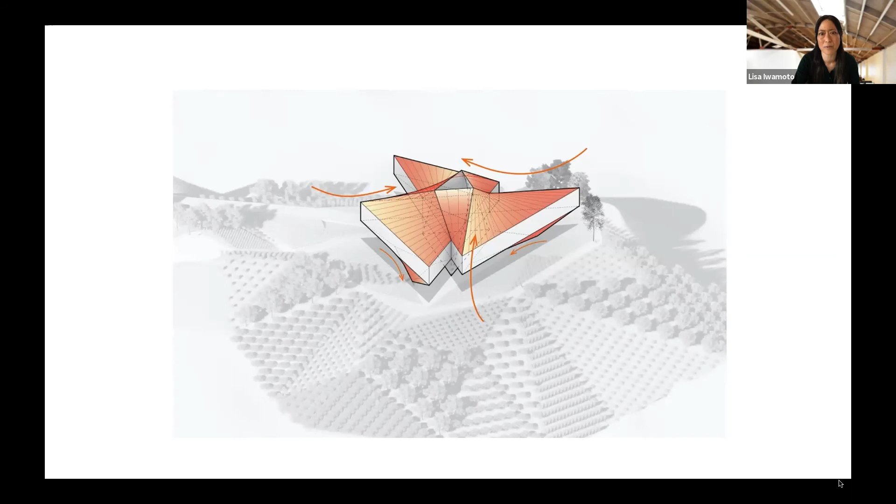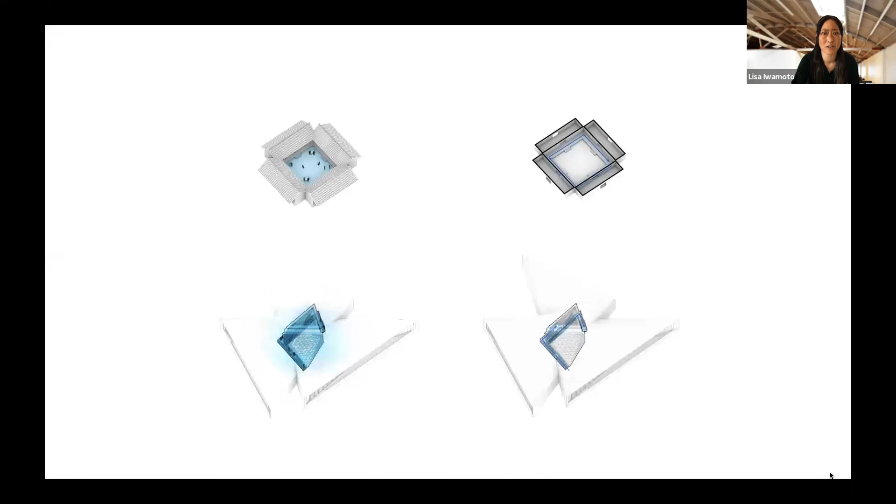And so the crystal itself and the balconies become occupied, the edges of those wings. Again, just taking the idea of the courtyard and reframing it for this new pavilion building. It also becomes a social hub and social center, very much like the traditional architecture, and a circulation armature for the building as well. Just a quick section through is the crystal.

And then we have the primary bleacher stairs, which travel up through underneath. And then the outdoors is allowed to slip into the building from up above. There's a panelization of the roof, so the roof is both solid and glass.

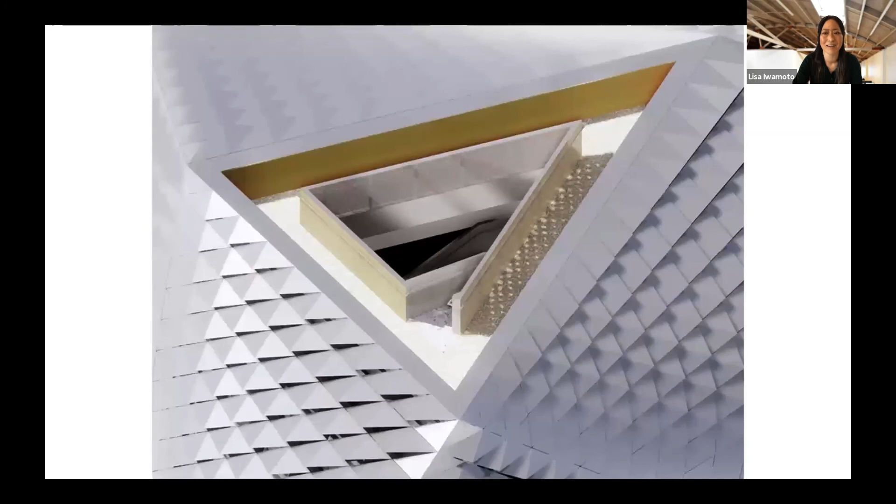And the panelization of the roof respects that to allow light in a dappled kind of way. So being inside the crystal is not just about the technology, but these panels open up into different levels. One also gets the idea of the kind of dappled light on the interior, as well as addressing all the stuff that has to happen behind the skin, such as mechanical ventilation, as well as light.

A few images of the pavilion, which sits on a set of knolls, which is really specific to the region, this kind of fractal landscape, which the building also responds to. And then the pavilion, which is literally an elongated version of the pavilion.

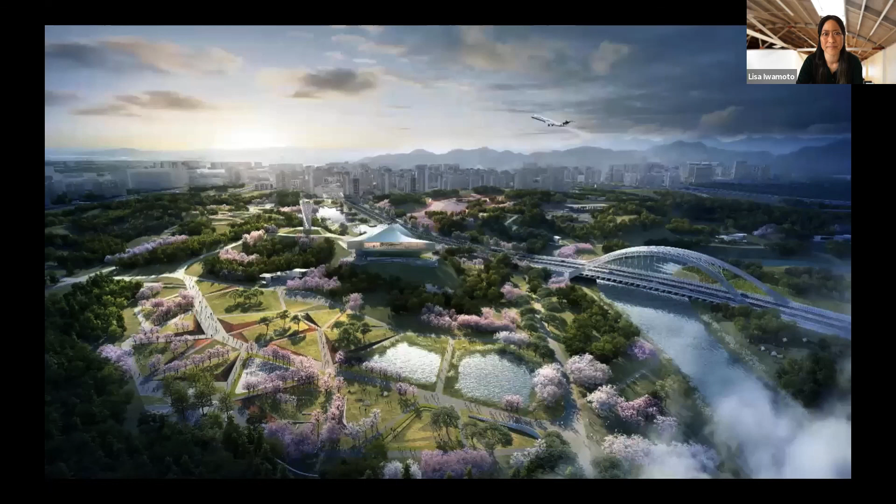A view looking out towards the larger park with the pavilion sited there. And then, we're not working on the landscape, but working with the geometry of the pavilion to think about the landscape as a kind of subtle reflection of it.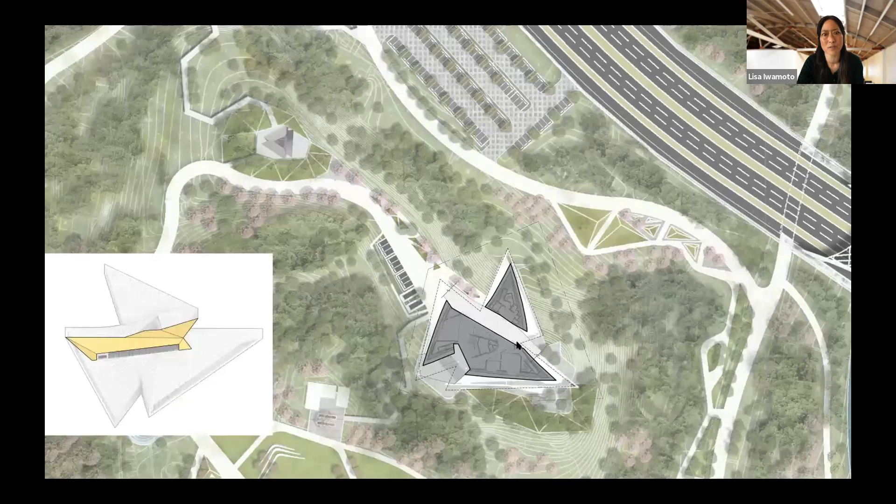So cutting through the crystal is a breezeway, which forms the primary entry. But the idea is also that it breaks open to form an amphitheater, which looks out towards the new future science and technology town. And so the exterior is actually weaving through the building in a couple different ways.

This is the breezeway here and the amphitheater. And the amphitheater is an extension of the internal bleacher, which forms that vertical circulation and communication up to the second level, which is the exhibition level. Then there's a separate smaller stair, which wraps around and through the crystal to get to the ultimate top observation deck.

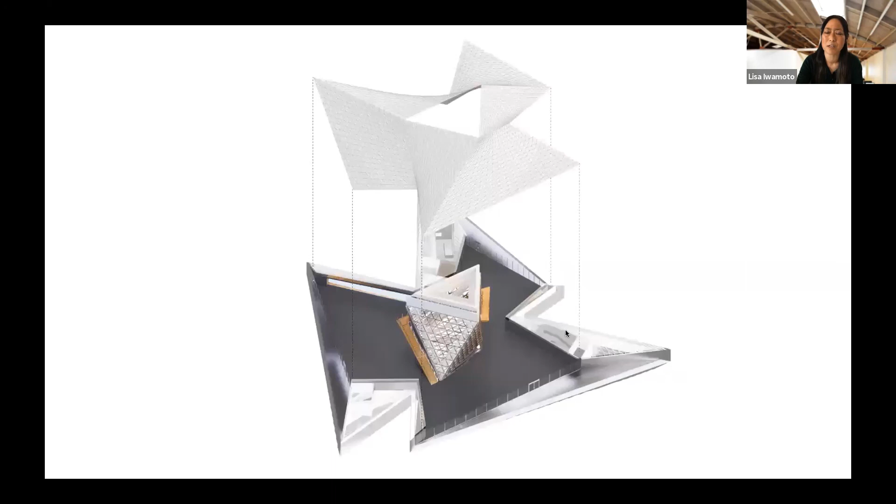A view of the exterior amphitheater. And the idea is that this region is also the fruit basket of China. So the orchards and other native plants, native and non-native plants, will be populated there.

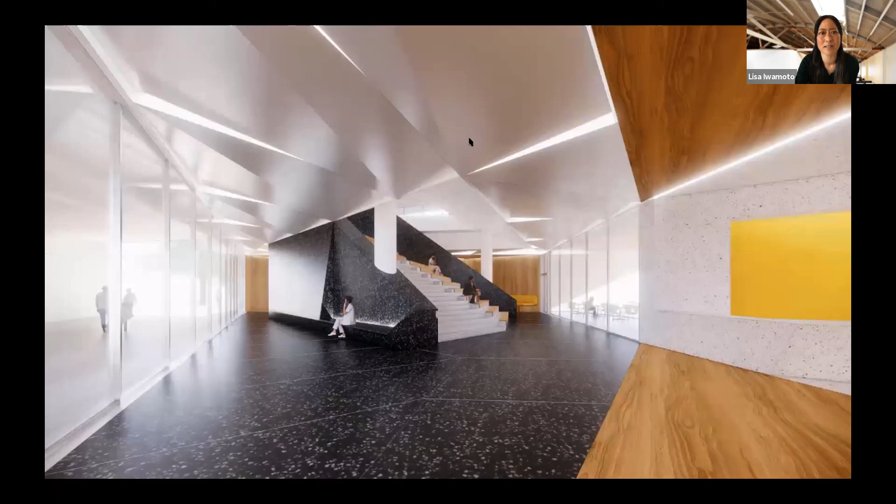Then a view entering the breezeway, which moves inside. Again, thinking about this relatively restricted floor to ceiling height, but again using some geometries and simple folding to allow light to come through in more sneaky ways. I think you guys are familiar with that with your beautiful building that you have.

And then the smaller pockets, this is shown unfurnished, but the cafe, and places where people begin to occupy, being made out of the wood.

Moving up underneath the crystal, which again is that piece of the outside and has operable windows for natural ventilation. I'm going to really see this as that green space within the building. Again, a kind of breathing element.

And then the stair which wraps around and ultimately through our vertical hanging garden to the observation deck up above.

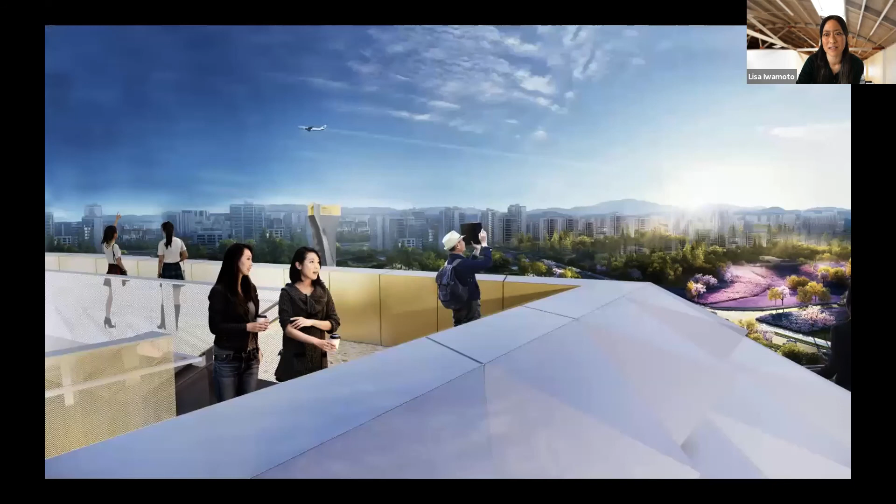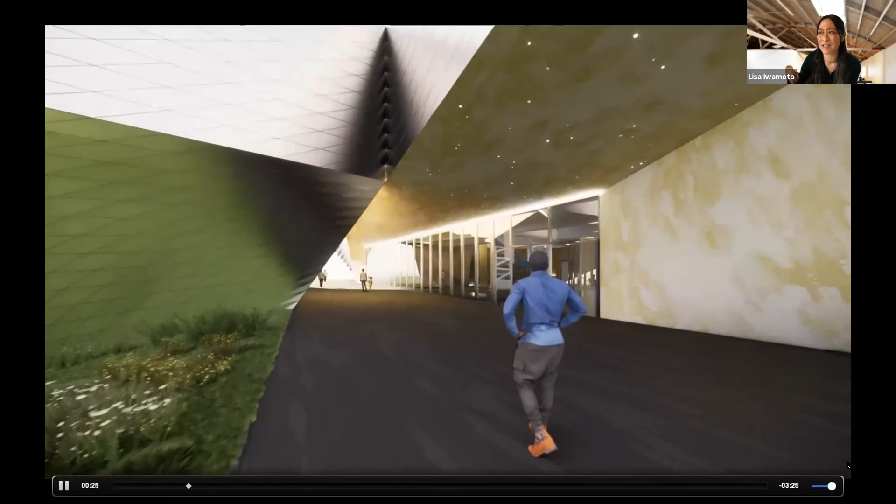And then again, similar to, I think, I feel like certain things start to reappear in our work, and I suppose one of them has to do with voiding out areas for reasons of site connectivity, like the Goto house with the porches. We see that again in the upper balconies here.

There's going to be a tile mosaic which speaks to the ginkgo of the region, which is a plant for the city.

So the pavilion itself is about 30,000 square feet, 3,000 square meters, so not very large, but wanting to get a lot of impact from the elements that we do have.

And so the crystal is lined with an LED mesh, which will be an interactive and responsive technology for when people do move up the stairs.

And then that opens up onto the expanse of the second level, which has a double skin—actually a triple skin. There's exterior panels, the structural grid work, which is a grid shell, and then an interior perforated ceiling, so the lighting can be integrated from within. We can also capture the different times of day with the way the daylight enters underneath those exterior panels.

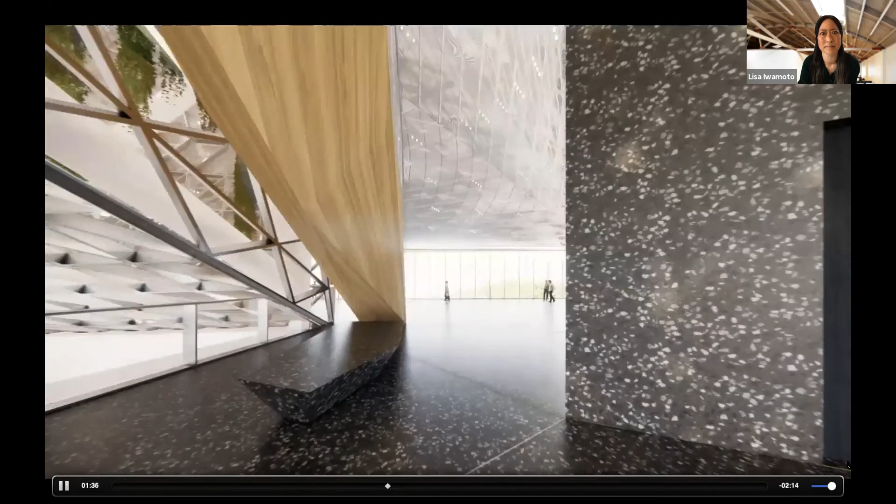This is not showing exhibition yet, other than some integrated walls. The idea is that all the surfaces of this building, or all the glass surfaces, can become display elements, and then there will be a series of objects in here as well.

So just the arc of the day, reflected both through the crystal and through the perforations, and the continuous mesh of the crystal.

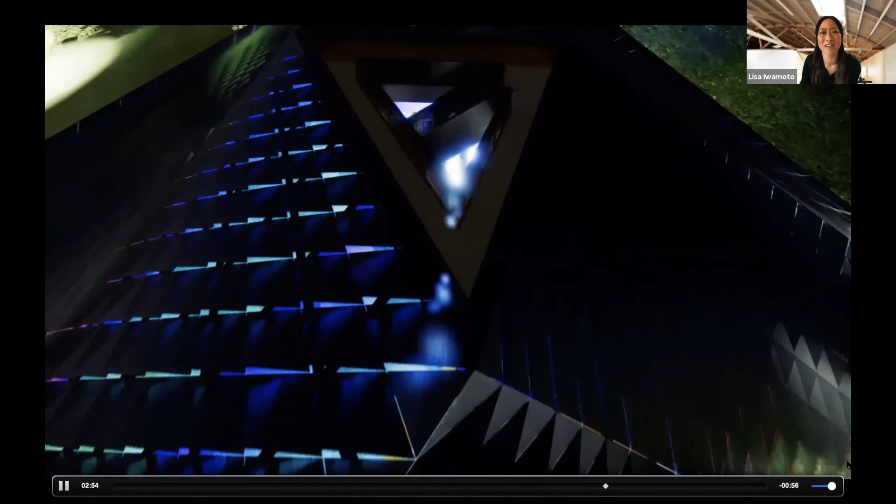And then of course the lighting within is programmable for different seasons, events, and things happening in a future science and technology town. We're currently working to see if we can get a holographic projection off the top of the observation deck.

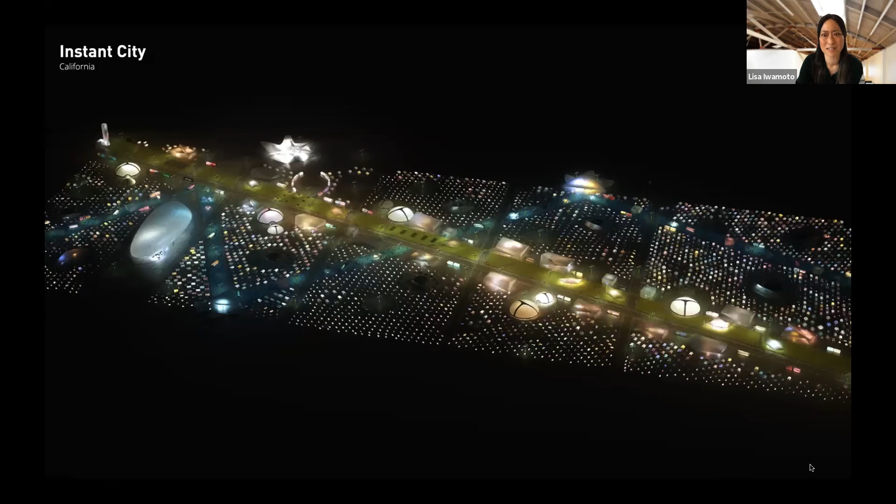Okay, I think I have one more minute, and I'm going to describe this project, which is at a very different scale. We had an opportunity, because of speculative work we did, to design an instant city. It didn't end up getting executed, but it was for a large technology company who wanted an instant city for 10,000 people for their annual conference, very much inspired by Burning Man.

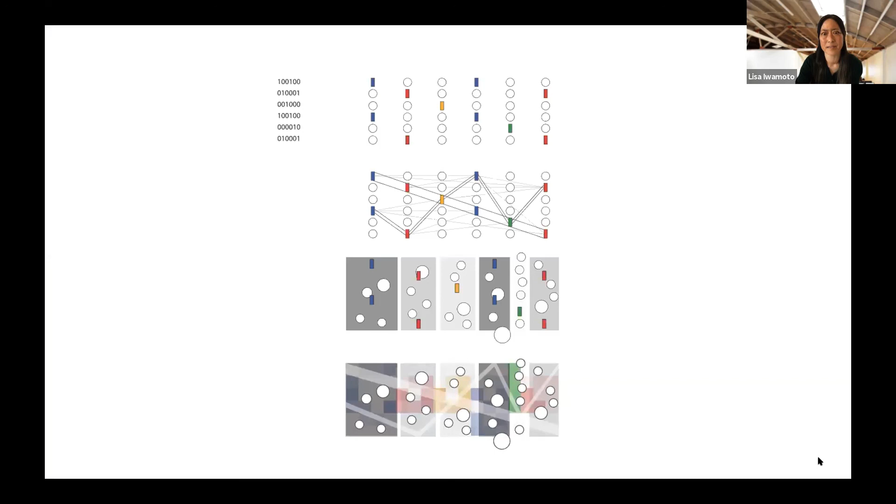In the desert, thinking through leaving no trace behind and the different ways—from Archigram and Archizoom and Team 10—instant cities could happen, to the much more informal trailer circles, to simply camping. We took an abstracted idea of the brand, and the idea of pixels and 1s and 0s, translating that into an infrastructure of a diagonal and a zigzag, as well as the 1s and 0s of potential trailer circles and the camping that would happen in between.

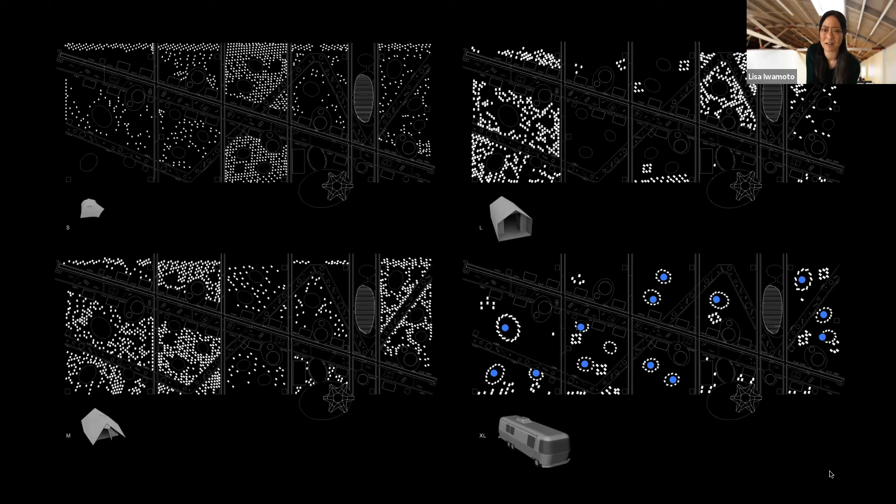We were thinking about, in our case, having been learning about parametric technology to make buildings, employing it here at the urban scale—taking a set of relationships and thinking about how those relationships would shift automatically based on slightly different site conditions, because the idea for this instant city is that the site could change potentially every year.

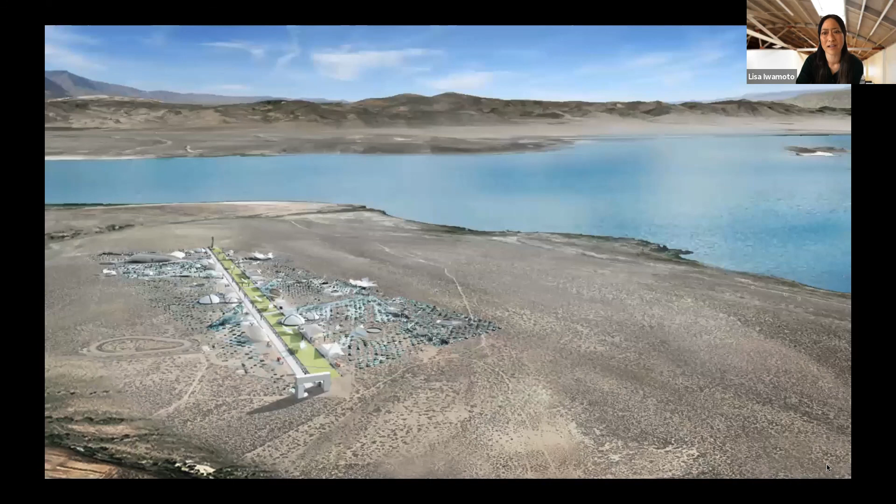So just having more figural elements among this field of informal settlements, almost along the infrastructural spine and the diagonal, and that it could take place again—in Mono Lake, which we studied first, to a farmland, to an old Naval Air Force base—being an apparition at one time, but of course highly ephemeral at the same time. Thank you.

Thank you. Thank you very much, Lisa. It was really a fascinating and stimulating presentation of ideas, speculations, and built consequences.